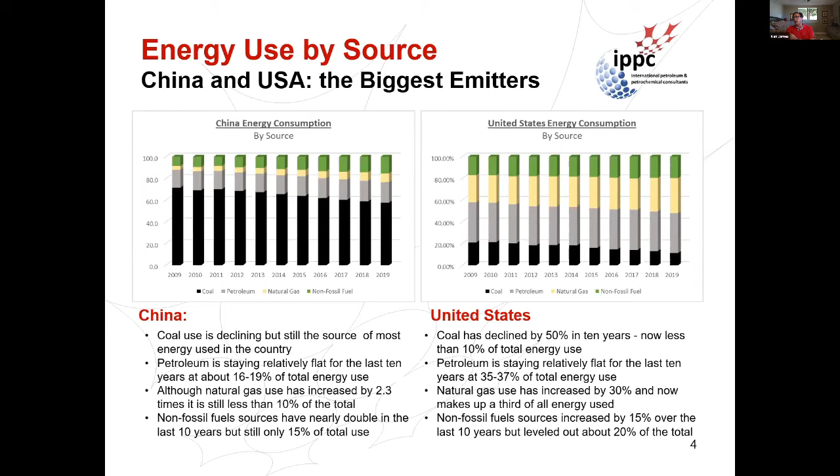So the focal areas that I've seen as people are looking to reduce carbon emissions, from the sources point of view, one is to look at less carbon intensive fuels. Coal phase out is well advanced, especially in Europe and North America. Similar phase out I expect will happen with the liquid fossil fuels.

And I think people are slowly accepting that natural gas has a huge role as a transition fuel as we move to other alternatives, whether it's blue hydrogen, whether it's nuclear. And I think we can tweak wind and solar, but again, those have limits on the capacity, and the wind and the sun don't always shine when we need the energy.

And then non-carbon fuels are getting a lot of attention. To me, you really have to look at hydrogen and ammonia, and carbon capture is essential to all of that. I just don't see it happening on any scale without basically being sourced from methane, electrolysis of water using green energy to make hydrogen, and then turn it into some other form of green energy. Thermodynamic processes are not 100% efficient. That just seems to be value loss.

So the focus I'm going to be focusing on in my presentation will be on the hydrogen and ammonia options as potential fuels.

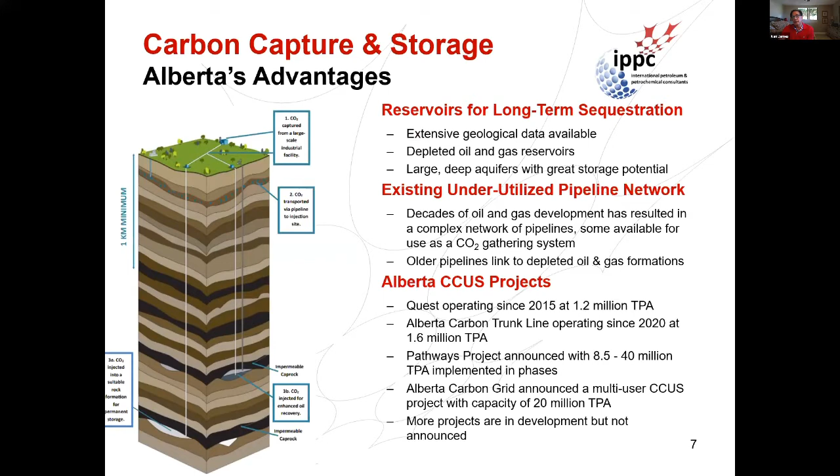So there is an opportunity for this province to capture tens, if not hundreds of millions of tons of carbon, which is a big advantage. That's a lot of natural gas being processed and carbon captured.

Some of the major challenges we're going to have, and I think Dr. Kumar referred to this, is hydrogen storage and distribution is difficult. It's a very low molecular weight molecule with a very, very low boiling point — it doesn't boil until minus 253 degrees C. So it is very difficult to get any density, and very difficult to compress and transport.

Pipeline connections to large consumer markets will be important. I don't know any other way that you're going to do it in any volume other than pipelines.

Ammonia is a very interesting option, in that it can be liquefied at relatively low pressure and offers an alternative way to transport to distant markets. At less pressure than you have in your propane barbecue, you can transport ammonia as a liquid, and it's got a high hydrogen content. And of course, when you use ammonia, it emits nitrogen — which is 79% of air anyways — and water.

Carbon capture, I think I've talked about this a lot — it's absolutely essential. Blue hydrogen requires large-scale carbon gathering and sequestration. Identifying the underground storage options and capacity will be critical. Nobody's going to build those blue facilities unless they know exactly where that carbon's going.

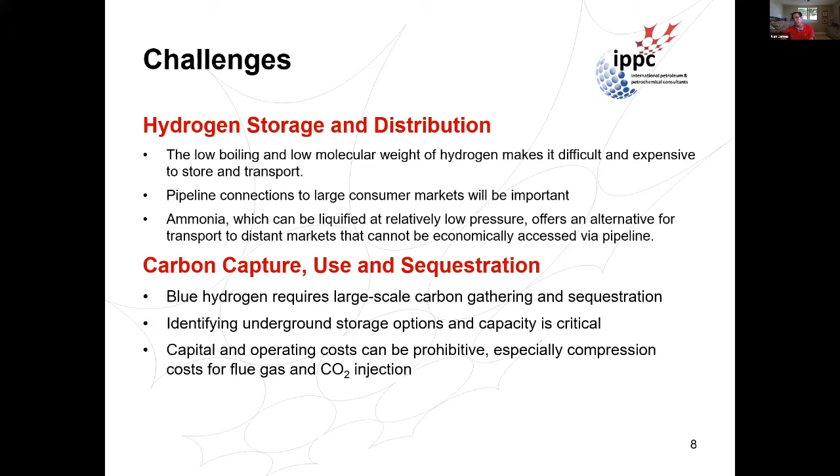Capital and operating costs can be prohibitive, especially the compression costs. Capturing CO2 from flue gas, most of the cost is actually compression, and the low concentration ends up in large volumes. The contactors end up being huge in the amine system. So there's a very, very high cost impact — and I'll get into the technologies that are addressing that.

Economics — carbon taxes can be major economic barriers unless those funds can be funneled back. Either they need to be uniformly applied across the globe, because otherwise you're just disadvantaging your own economy if other countries don't follow. And it's very critical that the carbon credits funded out of that carbon tax should be used to promote things like blue hydrogen.

Technically, over the last 30 years, we've seen a significant change in plant designs, but most of that was driven by energy efficiency. Early in my career, we only talked about peak oil, and I remember at the turn of the millennium we were talking about prices of oil going to $100, $200 a barrel. Companies got very focused on the amount of energy used. Then the shale gas and shale oil industries developed, and suddenly we had large amounts of gas and oil, and none of that came true. Climate change is going to change the focus again, I believe.

In the last decade, we've seen a lot of change in focus, but I haven't seen a lot of rubber hitting the road yet, but I think that's about to start. When we start thinking about these targets for 2030 and net zero by 2050, we are going to have to make some big swings very quickly. So we need to go back and look at the design of all of those energy systems, not just from an efficiency point of view. We're going to have to revisit the technologies we're using, and really look at how we design those facilities to reduce the cost of carbon capture and sequestration.

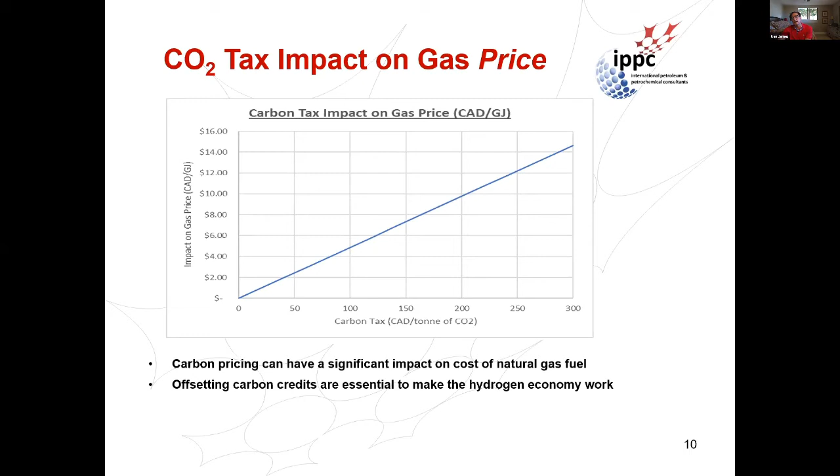You're basically feeding methane and water, converting that into what they call synthesis gas, syngas, which is a mixture of CO, CO2, hydrogen, and water. The primary sources of emissions are the stack, and of course all of the CO2 that was in the carbon molecules in the methane that is reformed to make the hydrogen. So that's a typical reformer, and that is the way hydrogen has been made up until now.

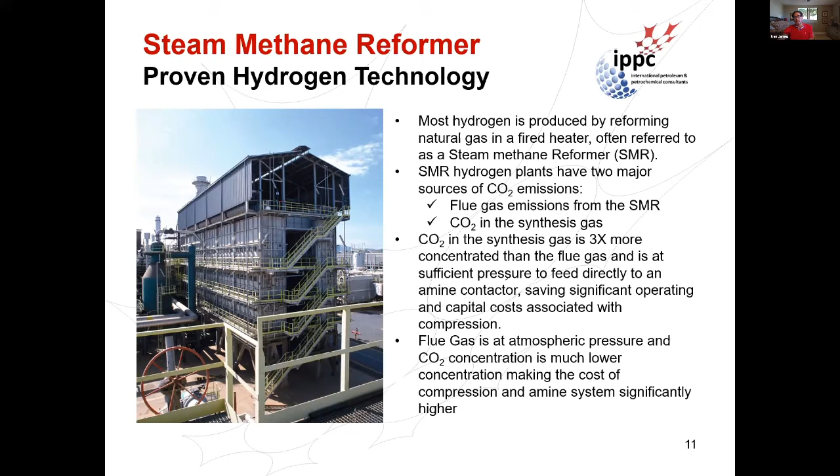Then that carbon monoxide can also undergo what they call a water gas shift reaction, reacting again with water to make CO2 plus hydrogen. So the net reaction is basically methane plus 2 waters makes CO2 and 4 hydrogens. It's interesting that only 2 of the hydrogen molecules came from the methane, 2 came from water — similar to what you'd do with electrolysis, but without using all that electricity. So it's important to get some of that hydrogen sourced out of water.

Partial oxidation — this is really where I think the changes in the industry are happening, in the design of a hydrogen plant to facilitate carbon capture. Partial oxidation is essentially injecting oxygen in substoichiometric volumes to not facilitate complete combustion, but partial combustion. You want to manage the amount of oxygen to control this first partial oxidation reaction, which takes methane and oxygen and turns it into CO and water. You don't want to keep going until it's complete combustion and turn it all into CO2, because there's an opportunity to react that CO with the water gas shift reaction to make even more hydrogen, which is the objective of the hydrogen plant. That is the technology essentially that leads to an autothermal reformer.

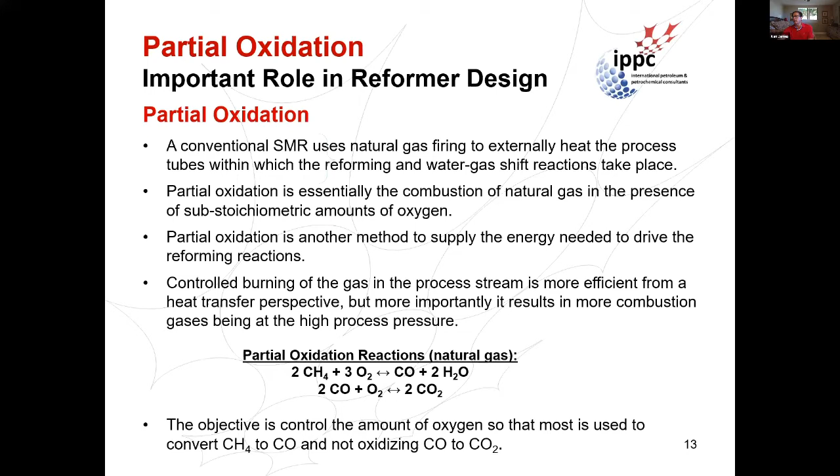With direct contact heating, it's virtually 100% thermodynamically efficient in transferring that heat to the gas, so that's a much better way to do it. The more efficient you are, the less gas you need to burn and the fewer carbon emissions. The other benefit is that the CO2 here is at full pressure. And if you recall, one of the biggest costs in carbon capture is compression. If you can do this at full pressure, then carbon capture becomes very routine.

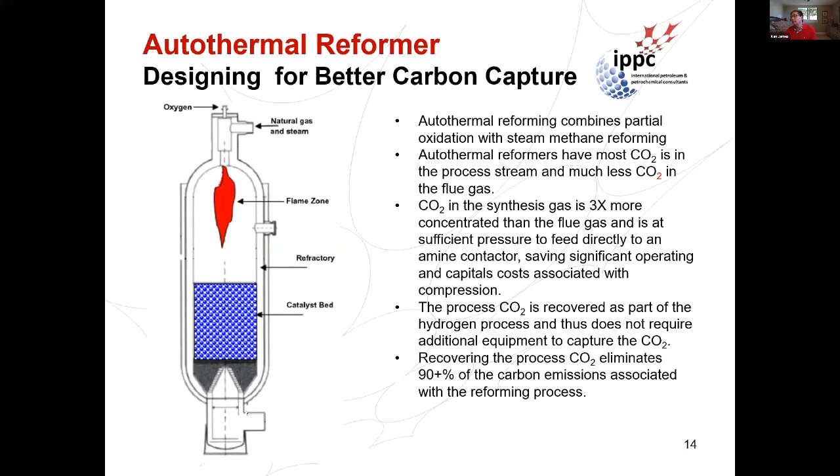So hydrogen as a potential non-carbon fuel. Advantages that I see are it can be produced in large volumes in this province. We've got lots of gas, and we are looking for new markets. We can locate it adjacent to underground formations suitable for carbon sequestration, reducing the cost of transport quite a bit. Existing pipeline networks can be used for distribution, which is important for reducing the cost of this full carbon gathering sequestration system. It can be used as a carbon-free fuel in a number of applications, whether it's combustion in fired heaters, used in fuel cells, or gas turbines.

The big disadvantage there, I think I mentioned, was the storage, a major concern. And there's no existing market. So we're going to have to count on the fact that if you build these plants, the markets are going to develop, and the incentives provided by the government will be sustained to make the economics work.

Ammonia is the other alternative fuel. So to me, that has some big advantages, in that it can be produced in large volumes. Its energy density is much higher. Again, it can be liquefied at moderate pressure, easy to then ship across oceans, which is not practical for hydrogen in my mind, not in any volumes.

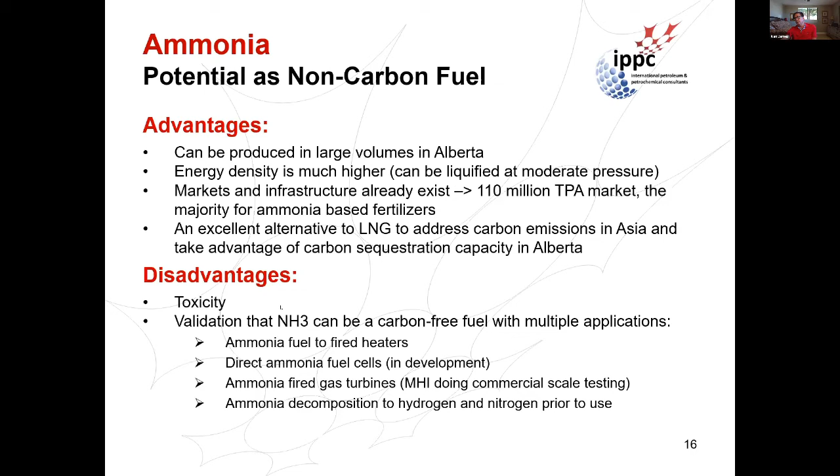So in my concluding remarks, I'd say the government policy on carbon credits needs to be clear for the long term to support project development. It's a critical role for the government to play to provide that stability to make these large investments.

Carbon capture infrastructure needs to develop immediately. Alberta does have a good head start, and there seems to be a lot of interest, so I'm very encouraged with that. I hope it does unfold to the scale that people are talking about. If companies are talking of having 50 to 100 million tons of carbon storage by 2030, that would be a great opportunity for the province.

Hydrogen markets, I believe, are going to need to be accessible by pipelines. We've got massive amounts of hydrogen or natural gas distribution, so we'll probably do the conversions where they're used relatively close to where the users are. And if we can convert some of the large pipelines that used to export gas to the US, maybe that's an opportunity for the US. Ammonia, I believe, was the most viable option for providing an alternative for Asian markets.

And I think there's a lot of work that needs to go into plant designs for hydrogen and ammonia to basically focus on efficiency and better facilitate carbon capture. And that's my presentation, so if there's any questions.

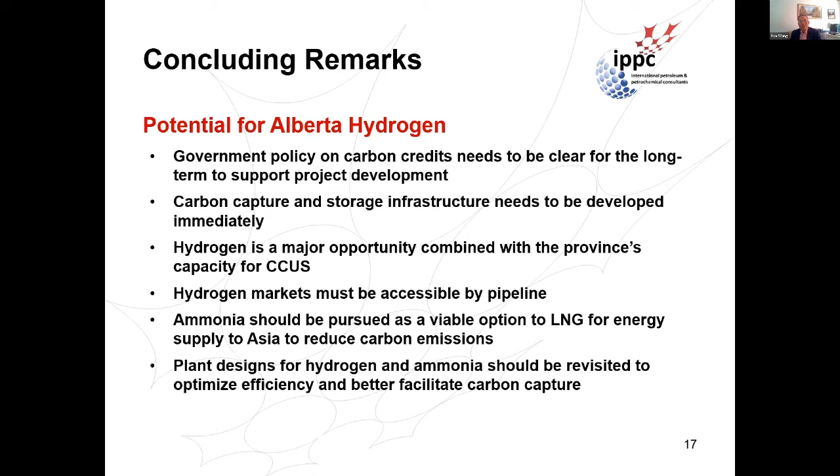Yeah, okay. Our next speaker is Mr. ZhiMing Mao, who is a graduate from the very top technical university of China, that's Tsinghua University. And I'm jealous.

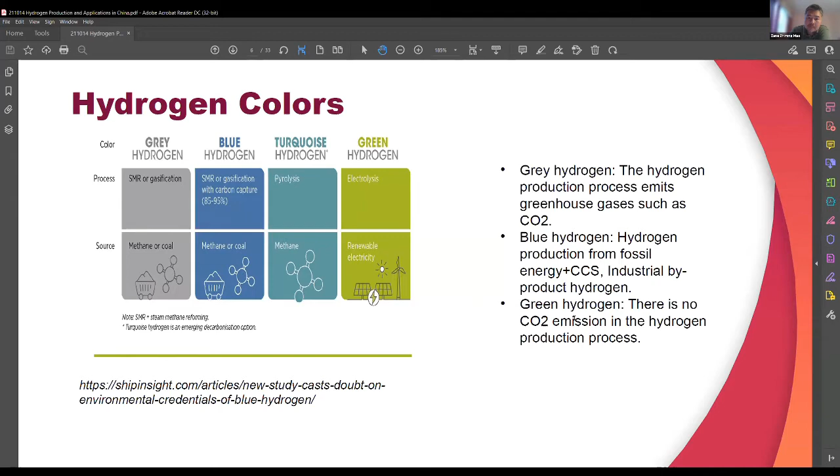As reported, hydrogen production in China is about 21 million tons in 2016, 30% of global production. Next is US, approximately 10 million tons each year according to DOE. Canada ranks in the top 10 with some 3 million tons annually for industry use, approximately 4% of the global total. Around 96% of global hydrogen production is generated from fossil fuels, including 48% from natural gas, mostly natural gas reforming using steam, 30% from hydrocarbons and alcohols, and 18% from coal. Hydrogen production from water electrolysis only counts about 2 to 4%.

In China, about 62% of hydrogen is generated from coal right now, and about 19% from natural gas, because China has a lack of natural gas. Hydrogen by water electrolysis only accounts for about 1%. For a long time, hydrogen has been used in agriculture, chemical, metallurgical, and many other industries.

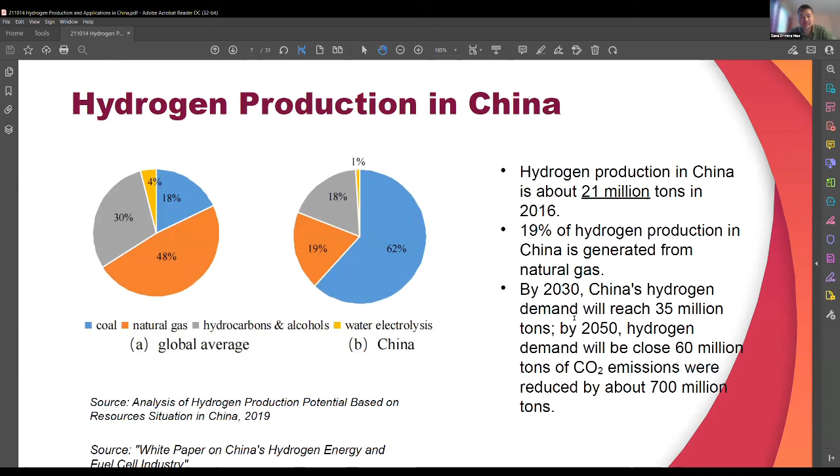In 2021, more than 1/3 of the big enterprises made the hydrogen layout in the entire industry chain, including hydrogen production, storage, refueling, and use. This group includes Sinopec, PetroChina, National Energy, Hu Huanyong, State Power Investment, Three Gorges, National Nuclear, and many other big groups.

Sinopec is the biggest one, the world's largest petroleum energy consumer, and it produces 3.5 million tons of hydrogen per year, accounting for about 14% of China's total. In the next 5 years, they plan to build 1,000 hydrogen infrastructures, hydrogen filling stations, or hydrogen and gasoline combined filling stations. Its goal is to become China's biggest hydrogen energy provider.

According to Hydrogen Energy News, from January to October 2020 the domestic hydrogen industrial investment reached 140 billion yuan. In the first half of 2021, the total investment of hydrogen fuel cell projects in China exceeded 170 billion yuan, around 30 billion Canadian dollars.

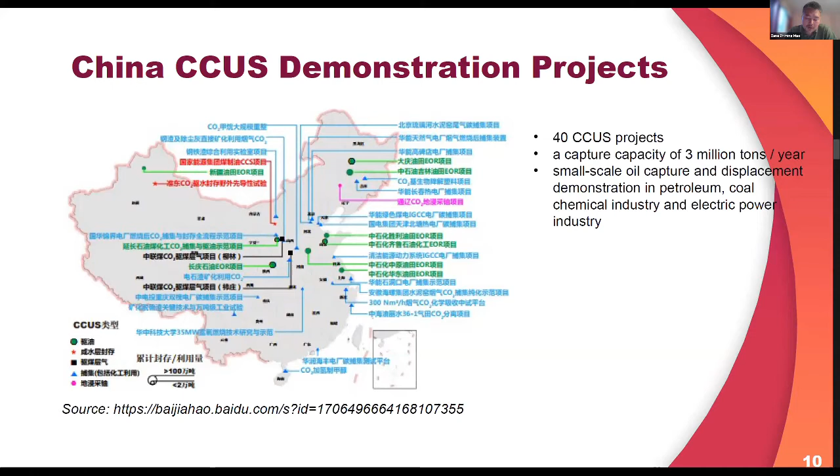This is one of our projects: HCNG, hydrogen mixed compressed natural gas, from 2010, with Hu Huanyong. We cooperated with Shanxi Natural Gas Corporation to establish China's first HCNG station, generating daily 200,000 cubic meters for industrial and heavy truck use.

Before that, we developed technology for the HCNG internal combustion engine, pressure vessels, mixing skid, and metering devices. The project investment is around 15 million Canadian dollars for the station, covering an area of 7,000 square meters at the south of Shanxi province near the Yellow River.

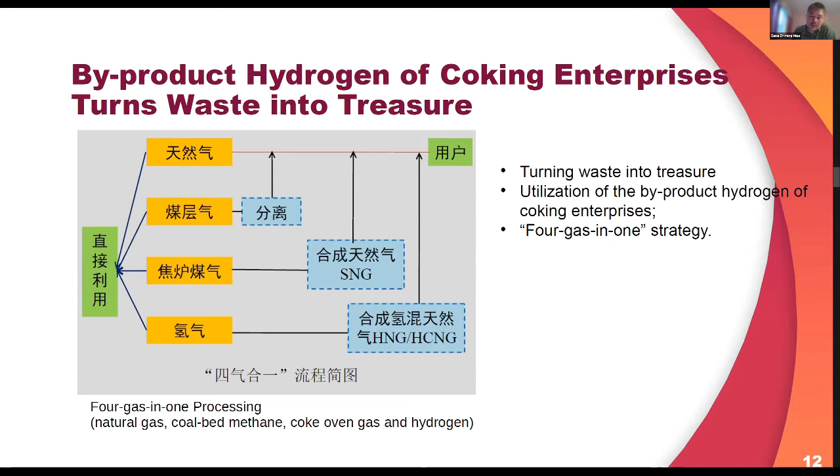This group controls 80% of the natural gas pipeline network of Shanxi province. The station provides HNG to industrial customers and HCNG to truck fleets, with 3/4 for industrial use at low pressure around up to 6 megapascal, and others compressed to 22 megapascal for heavy truck fuels.

For the mixer, we use a static mixer and pneumatic fume cut valves to check the flow, pressure, temperature, and Wobbe index for proper positioning and responsive sensitivity. The control system has a self-locking function to prevent arbitrary operation.

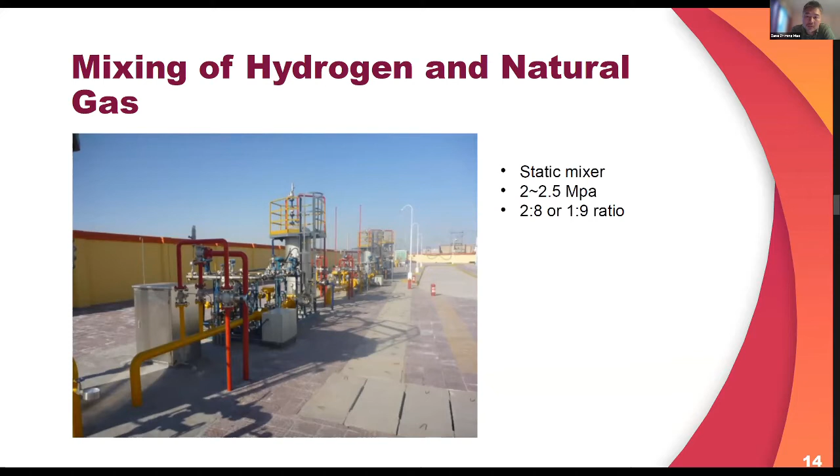The mixture rate is different: for industrial users, we choose a 1:9 ratio, and for truck users, we choose 2:8.

We use 3 steel wound high pressure gas storage tanks because of small area requirements and low construction difficulty. The tank is made by 80mm strip steel with a thick winding belt layer outside the inner layer of the tank to achieve high pressure resistance for safe, reliable, and stable operation.

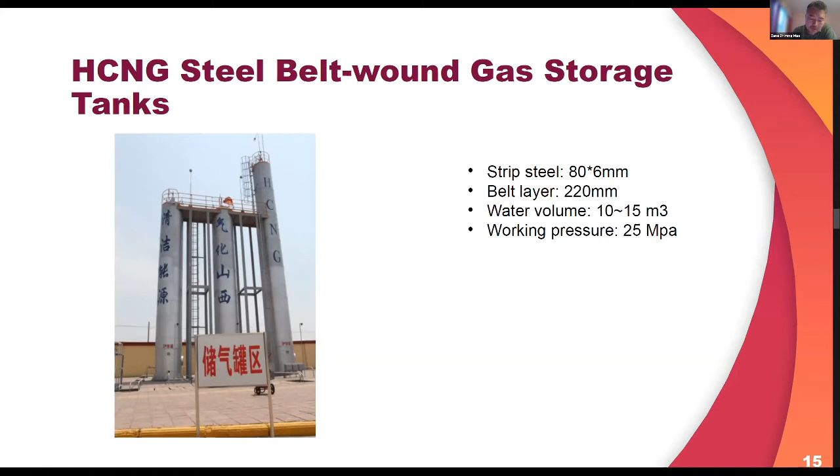The working pressure of the tanks is 25 megapascal, around 3,600 PSI. The water volume is 15 cubic meters for one tank, and 10 cubic meters for the others. We use diaphragm compressors as compression devices for the mixed gas, because it's a non-oil lubricated positive displacement compressor, which we adapted for the HCNG fuel.

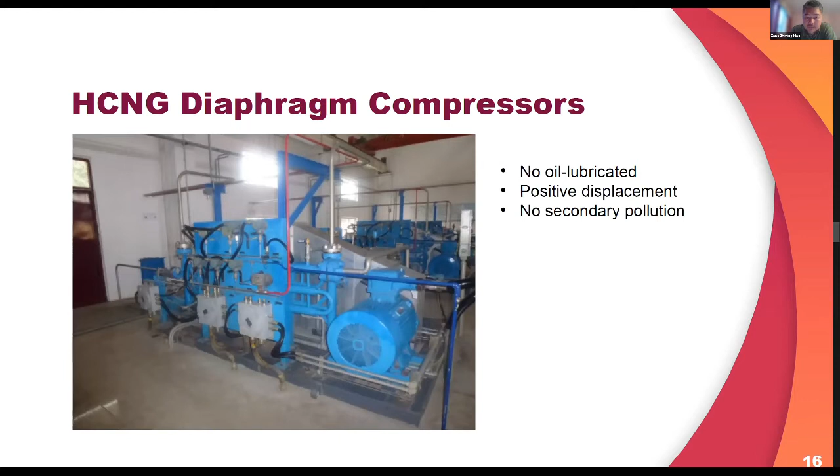The HCNG fueling reduces the emission of pollutants, mainly carbon dioxide and NOx, from the automobile exhaust. Compared to pure CNG fuel, it can reduce emissions by more than 4,000 tons of CO2 and 40 tons of NOx, which is lower than Euro 4 standard.

We also push forward for the HCNG fuel station in China, using important data from our project and the standard published in 2017.

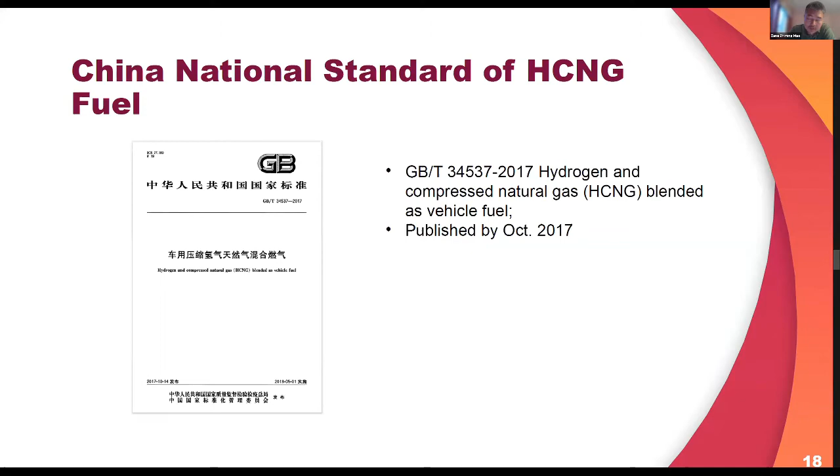For green hydrogen, China has strong solar PV and wind power capacity, which is the basis for production of affordable green hydrogen. Because of the cost problem, every green hydrogen project needs to consider how to get profit from it.

In 2019, China's new added PV power capacity was 30 gigawatt. The cumulative installed capacity reached 204 gigawatt, which generated 224 terawatt hour (billion kilowatt hour), accounting for about 3% of the country's total power generation that year.

In 2020, the cumulative installed capacity of wind power in China was 281 gigawatt, including 271 gigawatt onshore and 9 gigawatt offshore, generating 466 terawatt hour, about 6% of national total power generation and 21% of total renewable energy power generation.

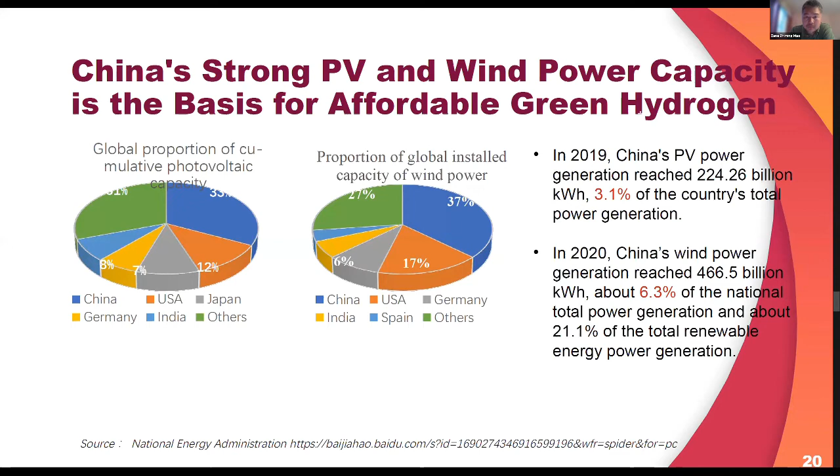The next case is another project in Jilin province, north of China: 200 megawatt wind power to hydrogen production. This project was designed in 2015, not only for science research but also considering economic evaluation, location, and local regulations, and it was approved by the National Energy Administration.

The main issue we wanted to solve is the unstable characteristic of wind power, using hydrogen production through electricity and proper operating mode to adapt to this situation in energy conservation process. The second issue is that at that time, forms of energy storage were very limited in scale, time, and space - it's hard to match the magnitude for wind curtailment and power rationing.

That only achieves very short period energy conservation and storage. So we wish hydrogen, as a form of long-term and large-scale storage and transportation, provides the possibility for a new business model in this project.

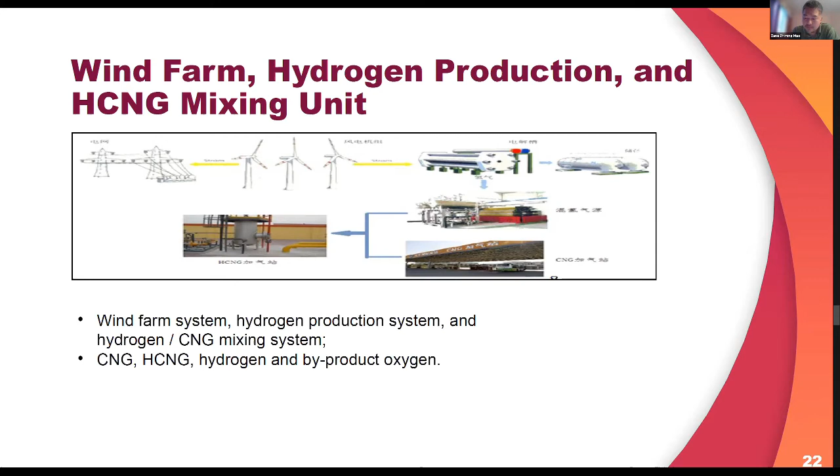That's China's fuel cell policy and national demonstrations right now. So far, China hasn't issued a national hydrogen plan or roadmap, but 30 local governments have issued their own hydrogen energy plans with varying timelines.

Recently, the central government announced two nationwide demonstration projects. One is Hydrogen Fuel Cell City, with 3 city groups running fuel cell vehicles. Beijing city group, including 12 cities, plans 74 hydrogen stations, and Shanghai, including 6 cities, plans 105 stations.

Another project is Hydrogen into 10,000 Families, jointly created by the Ministry of Science and Technology and Shandong province. That means 1 hydrogen highway, 2 hydrogen ports, 3 population science spaces, 4 hydrogen parks, and 5 hydrogen communities.

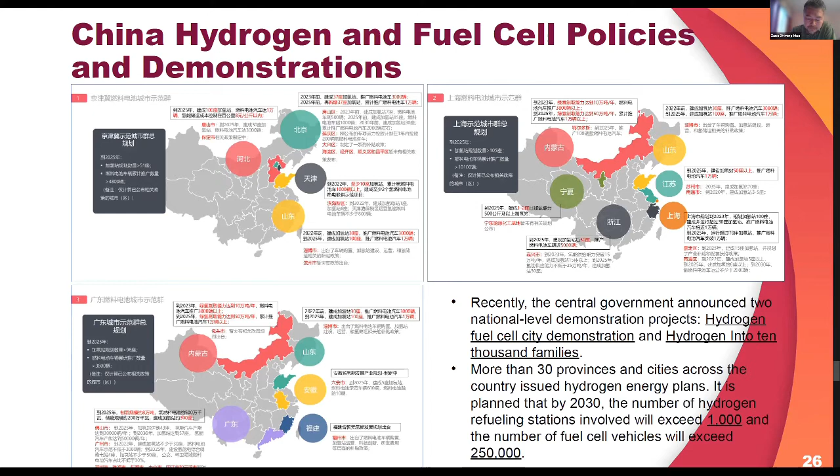In 2020, China had built a total of 118 hydrogen fueling stations, with another 167 under construction or planning. Among them, 101 completed hydrogen fueling stations have been put into operation, and 17 are to be operated - the third most in the world.

In 2020, there were 553 hydrogen fueling stations in the world, 200 in Europe and 142 in Japan. In 2019, more than 3,000 fuel cell commercial vehicles were produced in China, ranking first in the world.

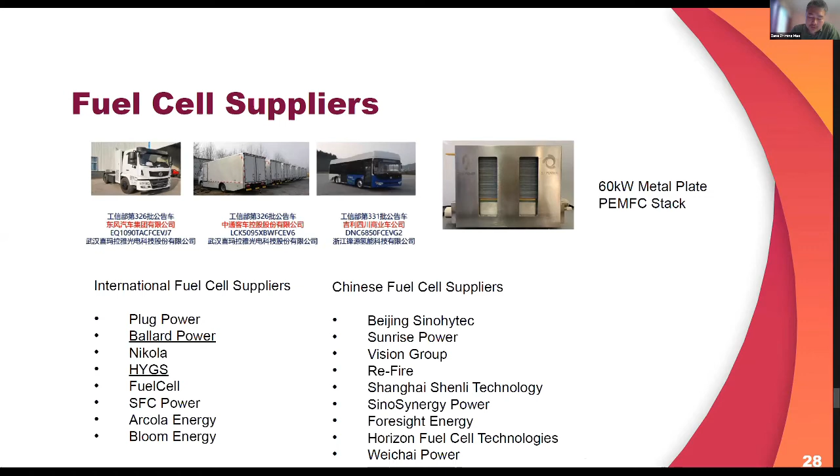The left picture shows fuel cell vehicles, buses, and trucks approved by the Ministry of Industry and Information. The right one shows a 60 kilowatt metal plate water cooling PEM stack made by one of our business partners.

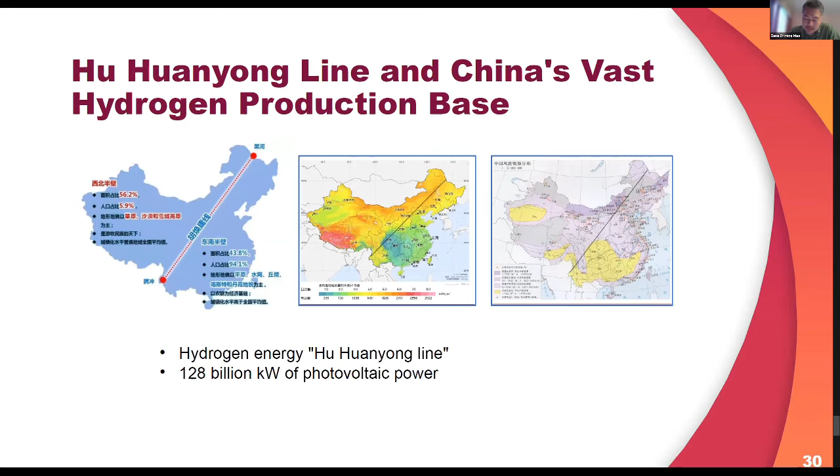And hydrogen strategy, such as natural gas, CCS, green hydrogen, vehicle use, and hydrogen export, is similar between Canada and China.

In real projects, the goals and conditions are very different. We really need a business model case by case for every concrete project to make it more successful. From HCNG, P2G, CCS, microgrid, energy storage, even desalination and many other projects, I wish more and more people can work together to produce more and more clean hydrogen to make the world better. That's all. Thank you.

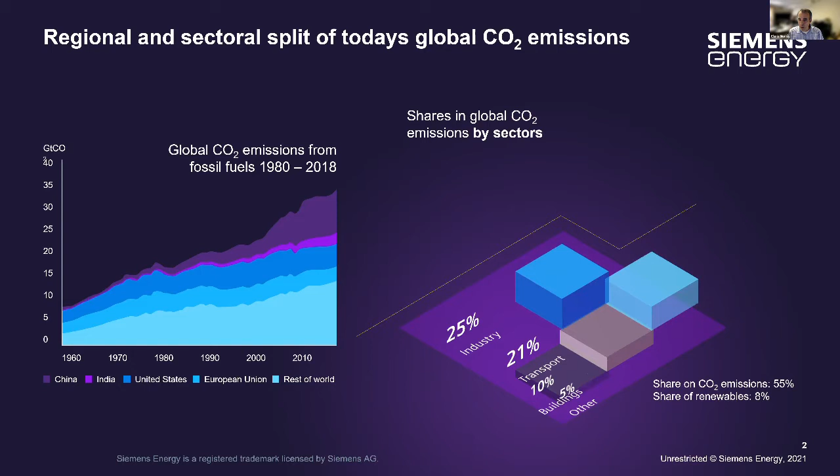And then we see that the power sector does have a significant contribution to GHG emissions, but what we're seeing, to everybody's optimism and excitement, is that a significant proportion of renewables is penetrating into the power sector.

Now, the question is, how do we decarbonize those difficult-to-abate sectors with the renewable energy that's coming online? We certainly will need a significant amount of new renewable energy in order to do it, but we'll also need the intermediate technologies to get the renewable energies into those areas of the economy that need to be decarbonized. And we use the term sector coupling to talk about how we're going to pull transport, buildings, and industry together with renewable power.

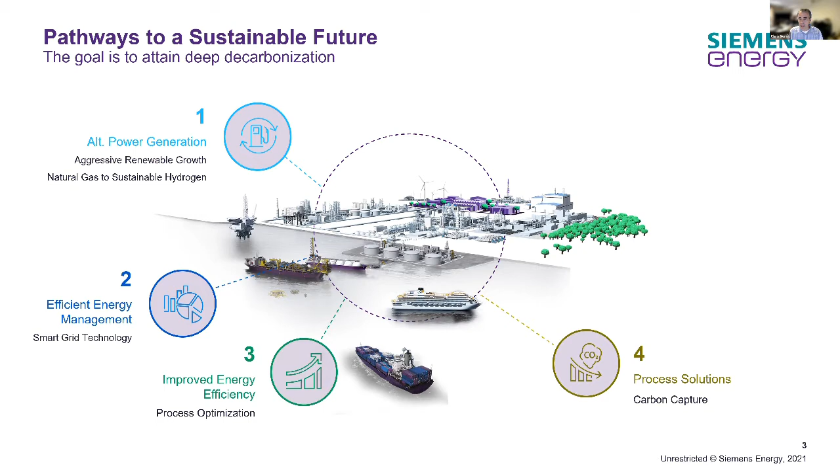And of course, there are process solutions. A lot of what we discussed so far today is about carbon capture from existing technology processes. And then, last but not least, we have one of the pathways to a sustainable future, which is hydrogen utilization.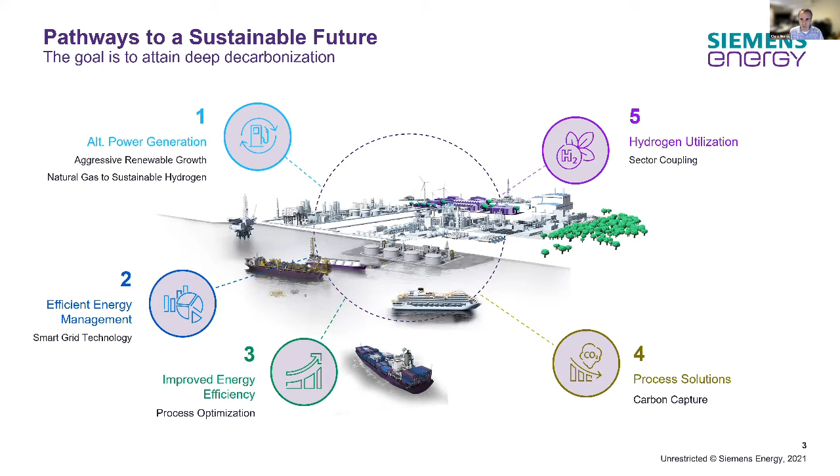Certainly, we've seen hydrogen emerge as a promising technology in the past. We're seeing a resurgence now, but I echo the comments of the previous commentators when I say that we need to make sure that we carry this momentum forward into actualizing what we're hoping for.

In terms of demand, I don't think I'm telling anybody anything new here about the rate of growth of hydrogen demand. It's anybody's guess what it's going to be in 2050, but the projections are that it's going to grow at quite a significant compound annual growth rate, if present predictions are any indication.

And then where does it all fit in? On the right, we see what Siemens Energy sees as essentially our field of action. Starting on the left, hydropower, wind power, renewable power production into the grid, solar power production, transmission. And then in blue here, we see our electrolyzer, we have compression, transportation of the molecule through the pipeline back to potentially a gas turbine where the re-electrification pathway takes place.

E-ammonia, I'm not telling anybody anything new here in terms of the amount of promise there is for the use of hydrogen as a coupling mechanism between sectors. We know that there are trillions of dollars in assets

worldwide right now that run on liquid hydrocarbons. Without stranding those, they're going to be operating for a significant period of time into the future. We need to do an infrastructure transition to operate on lower carbon intensity energy sources, battery-powered cars and trucks, as well as the multiple other uses of electricity used directly.

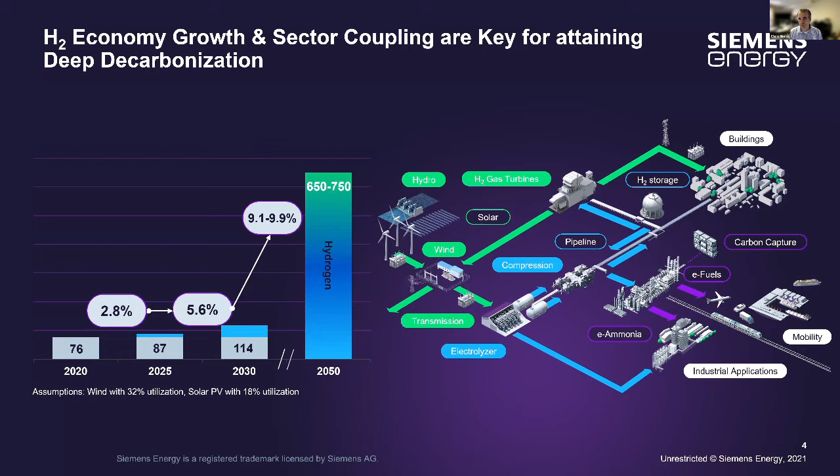A carbon-free hydrogen economy will support CO2 reduction. The question is, how do we make the hydrogen carbon-free? I think a lot of this has already been said by the previous speakers. I won't talk at all about the production of hydrogen because that's been clearly covered. But the title of my talk today is about readying the infrastructure for hydrogen, for the energy transition and the hydrogen portion of that.

So we see blending of hydrogen and transportation of hydrogen in physical form. As was just explained by the previous speaker, significant pathways exist and are being actualized in China as well as in North America and Europe. We see synfuel and chemical production in terms of methanol and ammonia, which are clearly two of the most promising pathways for managing this difficult to manage substance, hydrogen.

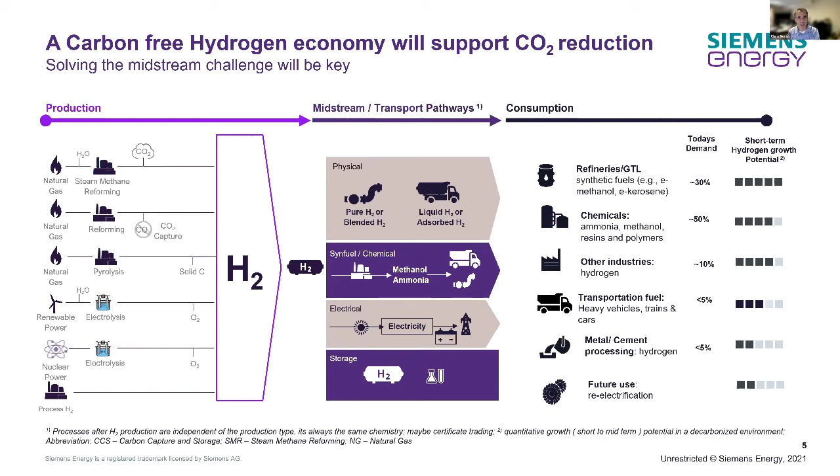Well, I'd like to jump right now into some examples. What are we doing here in Siemens Energy to actualize this promise? We have a project in southern Chile, the Haru Oni project, the world's first integrated plant for the production of climate-neutral e-fuels from wind and water.

So we are using carbon dioxide captured directly from the atmosphere, direct air capture carbon dioxide, combined with hydrogen from a Siemens electrolyzer, powered by renewable energy in the form of wind in a geographical area that has high wind potential, synthesizing methanol from these ingredients and then converting the e-methanol into e-gasoline for transportation back to Europe.

I think this makes an important couple of points about the way Siemens Energy, a German company, sees the future of the energy sector. One is Germany is going to rely on imports of power for a long time to come, imports of energy.

So why not be a producer of its own energy elsewhere in the world, especially where renewable energies are very promising? This explains the deployment of this project in southern Chile, in the Patagonia region, where the wind potential is very high. Bottle up that renewable energy in a usable form and transport it back to Germany.

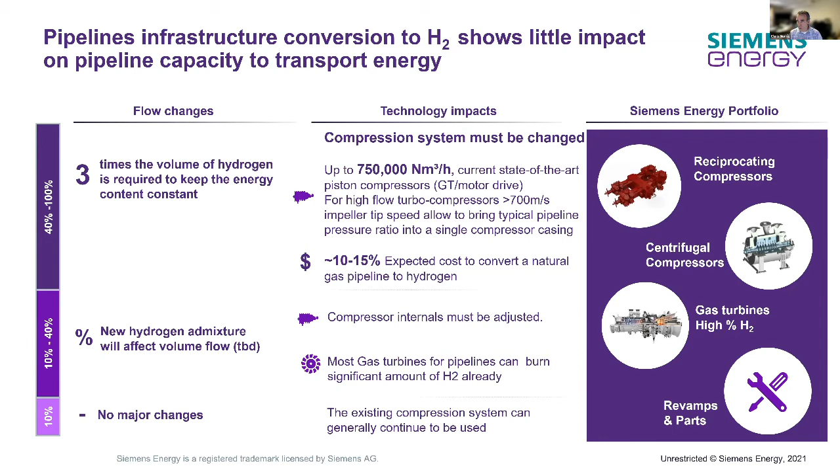As an example, Europe plans to create an extensive hydrogen pipeline and storage infrastructure, what they call the H2 backbone, connecting large industrial centers. We're looking at long pipelines, and an important aspect to recall is that moving these molecules, despite moving a lot of mass from place to place, in a linear pipeline arrangement you're able to move a tremendous amount of energy held up in those molecules, be they hydrogen, methane, synthetic methane, or any derivative. A long distance pipeline can have 10 times the energy carrying capacity of a high voltage overhead line, something even those of us who are advocates of green hydrogen need to keep in mind.

Converting those electrons into molecules and moving the molecules around is essentially very cost effective, rather than trying to build out transmission to do deployment of green hydrogen at a micro scale. For hydrogen transportation capacity by pipeline, despite the density difference and the energy difference that compensates, you can essentially have a net equal amount of hydrogen transmitted from place to place through pipelines. Of course, there are other technical aspects that must be considered, like the amount of power required to do the compression on hydrogen. But essentially, it doesn't take away from the promise of this substance as a decarbonization pathway.

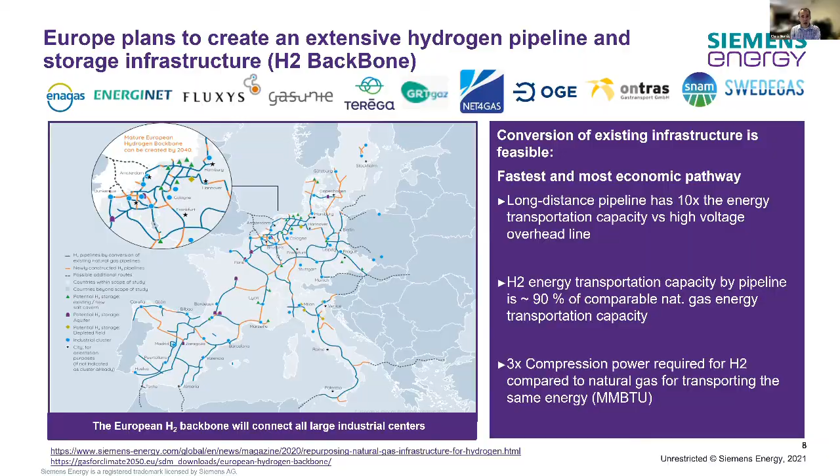So where does Siemens Energy capabilities fit into all this? Here we see essentially the value chain of green hydrogen. From the left-hand side, planning and consulting, Siemens can do essentially everything, including balance of plant.

I start here in the middle when I look at this figure, with the electrolyzer that converts electricity into a gas. We conventionally think of it as a device that converts water into hydrogen, but really it's a device that converts electricity into hydrogen and uses water as a proton source. It's an electricity gasifier.

From the downstream point of view, all the aspects you're familiar with Siemens Energy for, and Siemens previously, compressors, storage systems, water treatment, etc., all the handling of the gases can be done. Further downstream in the value chain, that's where we get into partnerships, whether it's carbon capture for synthesizing follow-on molecules, or the synthesis of molecules themselves. Our extensive abilities and partnerships in the industry facilitate that.

And then looking left upstream, from an electrical point of view, you're all familiar with Siemens' capabilities around transmission, distribution, substations, transformers, all the things that make the grid and the electric system work.

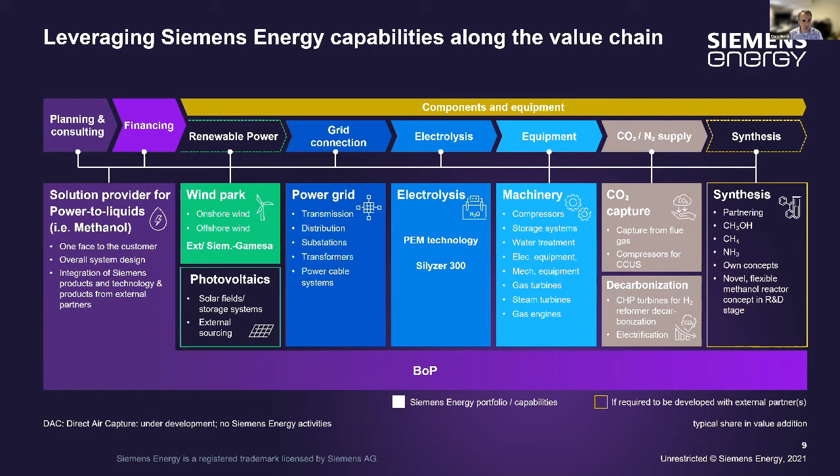So how do we scale this up? Our approach is the latest model of our PEM electrolyzer, the Silyzer 300, implying it's the third generation. Siemens has been in the hydrogen business for quite some time, whether it's fuel cells for military use, which we've done for decades, or the PEM electrolysis approach we've been working on for at least 10 years and commercialized a couple of generations of it so far.

Here we have the Silyzer 300, a 17.5 megawatt base system. Each of these modules is about the size of a residential fridge, just under a megawatt each, comprised of 50 proton exchange membrane module assemblies. The device operates at atmospheric pressure.

It's a very passive and robust device. All the fluid motion is driven by natural buoyancy. So you see a two-phase, or at least a gas-liquid mixture coming out of the modules and being separated in these separation tanks overhead. The downstream balance of plant does things like deoxygenation, drying, and compression for the downstream processes.

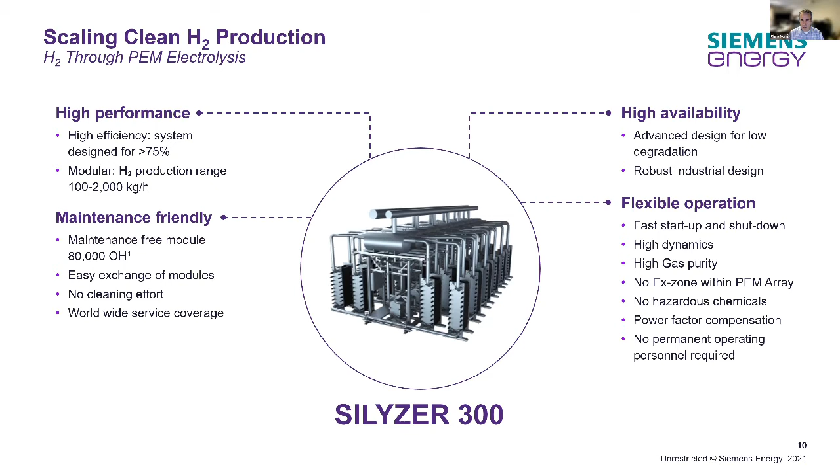High availability due to the robust design I mentioned. Flexible operation, as is the nature of PEM electrolyzers, and essentially maintenance free. An 80,000 hour operating lifetime for each of these modules, easy exchange of the modules at end of life, no cleaning effort, service coverage around the world. Really a strong workhorse for the new green hydrogen production economy.

Of course, it's digitally enabled with all the digitalization aspects that Siemens has in its capabilities.

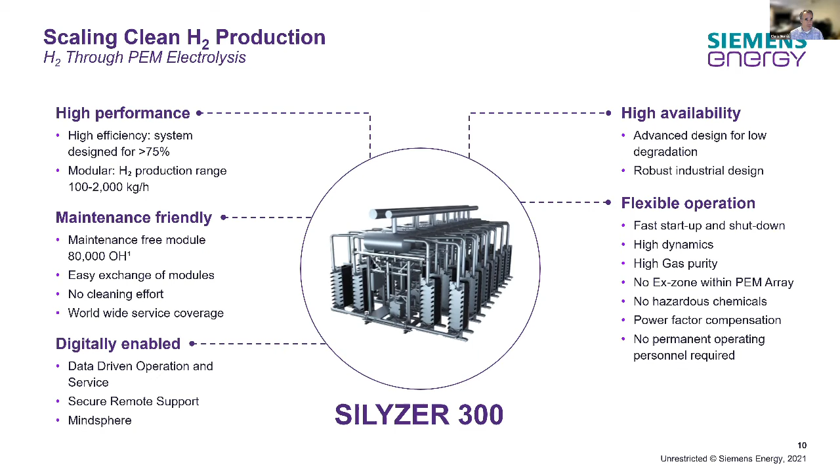So getting back to how do we keep our existing fleet? We talk about the energy transition, and it's important to remember that it is an energy transition. A lot of gas turbines are deployed and in operation. Siemens has a publicly stated goal of having 100% of our gas turbines completely hydrogen compatible by the year 2030, within 10 years. Many of them are significantly capable of burning hydrogen under current circumstances and with small changes to combustion systems, etc.

So with retrofits, as well as with new devices, we can see a significant reduction in the overall CO2 emissions.

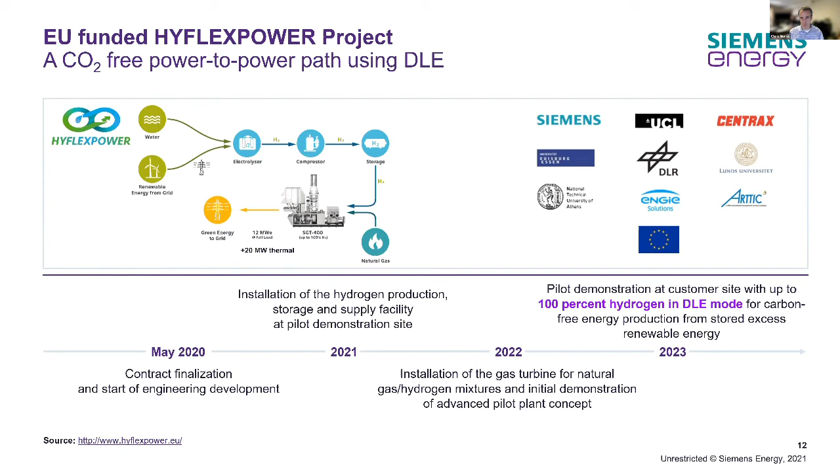Another example of what we're doing to make this real is a project with Duke Energy and Clemson University in South Carolina. Also similar to the previous one in the form of power-to-power, sponsored by the U.S. Department of Energy, basically taking low-cost renewable power and converting it into a long-term, low-cost storage mechanism.

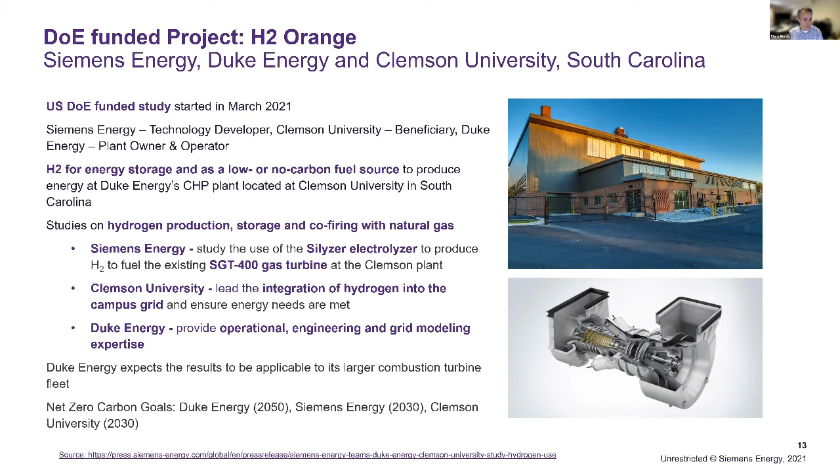Okay, well, I definitely wanted to keep my comments brief. I'm happy to answer more questions in the chat or in the forum.

But essentially what we see as the cornerstones of the future energy system: decarbonizing energy, sector coupling through hydrogen, power to X, so converting that hydrogen into other forms that may not be reused as power, for example, ammonia, as a basis for fertilizer. And we need to see, as some of the previous commentators have stated, a regulatory framework globally, also in Alberta, that promotes the use of hydrogen and the reduction of CO2 hand in hand.

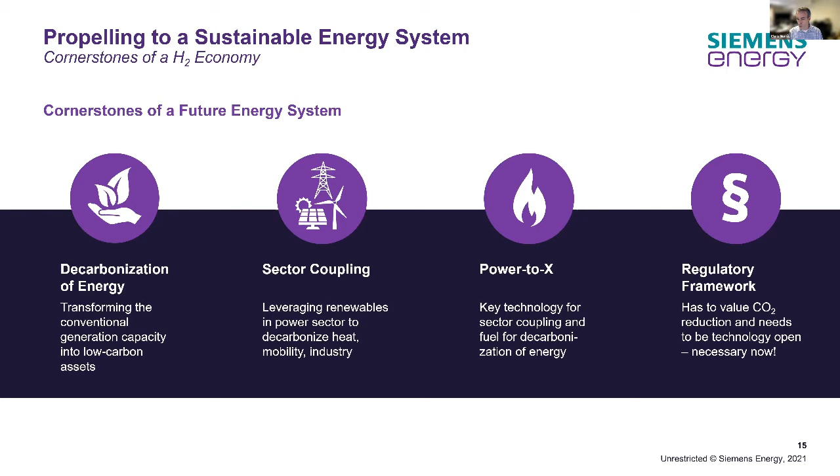With that, I'll say thank you very much, and I look forward to the questions and the discussion.

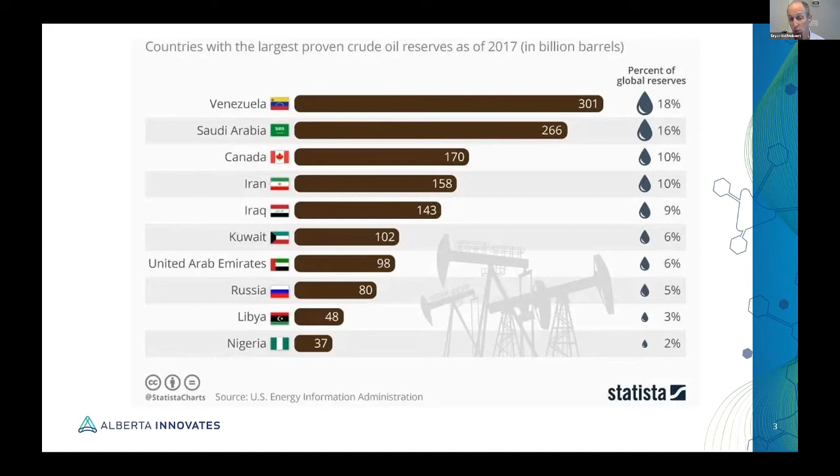And so this is a result of vehicle electrification, of hydrogen, we've heard so much about, a huge opportunity, circular plastics economy, a whole bunch of different global trends are conspiring to make this into an eventual reality. And so this puts us into an interesting position.

So Alberta is going to need new and expanded markets for this bitumen resource that we have a lot of. We want to maximize the value of that bitumen. We also need to reduce our greenhouse gases. And while industry has done a pretty good job at reducing upstream emissions, 80% of the emissions associated with bitumen and oil actually occur at combustion, or scope 3. And there isn't a lot out there right now to really look into that.

We also want to diversify the economy so we can get away from the boom-bust cycles that we've endured in Alberta. Now, a challenge is that bitumen has a high molecular carbon content compared to other oils. So we'll come back to that in a moment, but that is one of the key characteristics of bitumen.

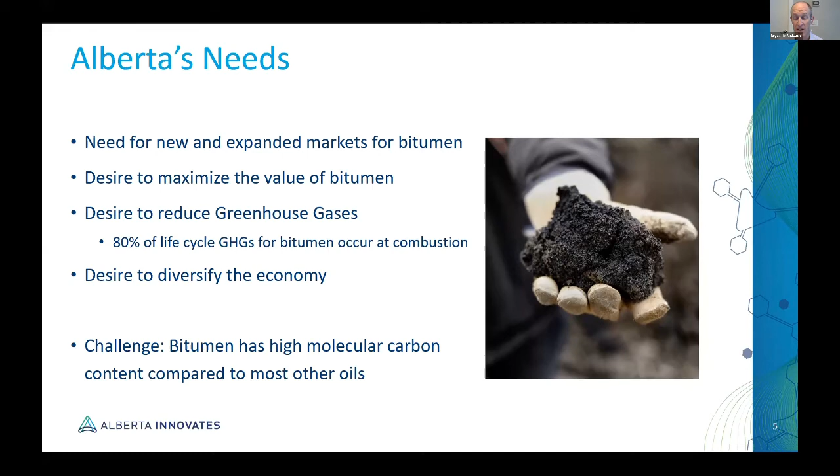Now, that's Alberta's needs. How about the globe? Globally, we are dealing with population growth. Over the next 30 years, we are going to grow the planet by about 2 billion people. That's about a quarter. To put that in context, that was the entire population of the planet only in the 1920s—not that long ago. And we're going to grow by that again here in the next 30 years.

In addition to population growth and additional prosperity, these populations are going to need energy products, which we're talking about, but they're also going to need materials for housing, transportation, infrastructure, and consumer goods. And if you look around you right now, what is it that a lot of the materials around you are actually made of but carbon?

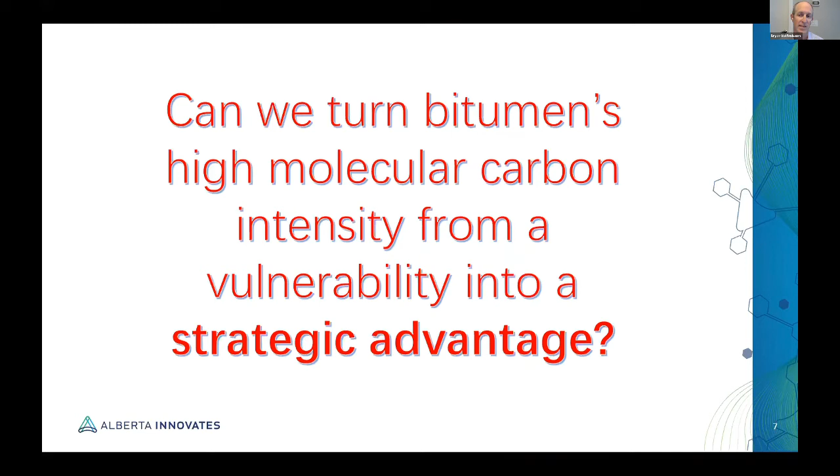Now, we talk about this low carbon economy, but it's a bit of a misnomer. What we really mean when we say low carbon economy is keeping carbon out of the atmosphere. Carbon in solid form is sequestered and inert, and therein lies the opportunity. Can we turn bitumen's high molecular carbon intensity from a weakness, which it is when making energy products and fuels, into a strategic advantage for making materials? So that very characteristic that makes it poor for fuels makes it a significant opportunity for materials. And hence we have bitumen beyond combustion.

Alberta Innovates launched this opportunity back in 2017. We commissioned Dr. Axel Meisen to do a white paper looking at all the different products that you could conceptually make out of the oil sands. And these aren't just carbon intensive products, but also some metals and minerals and such. Now, not all of these are necessarily a good idea, but they're technically possible.

So we followed that up the next year with a deeper dive into what we thought were the most promising opportunities. And many of these opportunities rely on this component of bitumen called asphaltene. Asphaltenes make up 15 to 20% of the barrel, and they are that heaviest component. They are what give bitumen that characteristic high viscosity, sticky, gooey stuff. And so we narrowed it down to these top 5 products.

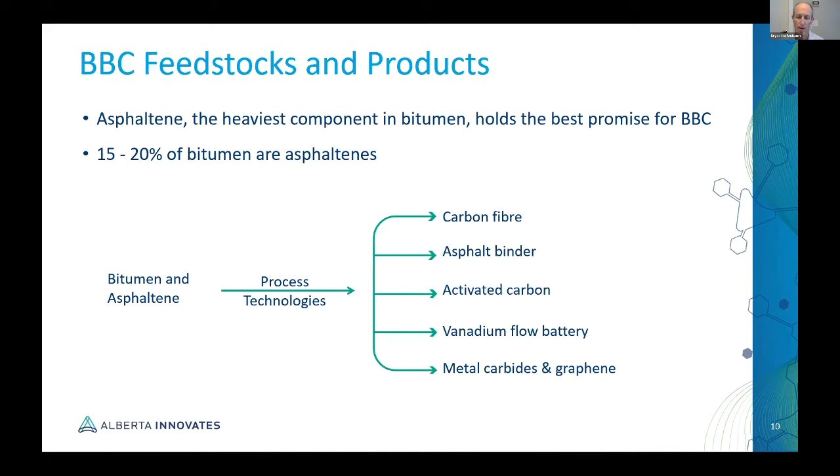Now, unfortunately, I only have 20 minutes, so I'm just going to address the first 2 products here, which are carbon fiber and asphalt binder. But there's certainly more BBC opportunity beyond that.

So let's dive into carbon fiber. Many people are familiar with it. It's a class of materials, not a singular type, characterized by extremely strong strength, up to 10 times stronger than steel on a weight-to-weight basis. And perhaps more impressive is that it is non-corrosive. And so that makes it a basically universal building material with a whole bunch of different applications. You may be familiar with it in your golf clubs, your hockey stick, or your bike. The biggest market is actually wind turbine blades, and of course aerospace and other.

Current production is a healthy 100,000 tons per year, growing at a very significant compound annual growth rate of 13% per year. But this is still pretty small when you compare it to materials like steel and other metals and plastics. So it's still fairly niche, even though it's produced at 100,000 tons per year.

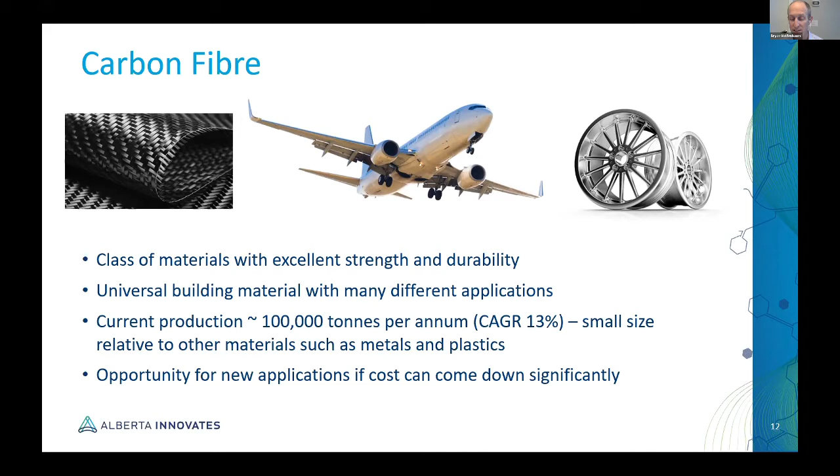Now, it's been well documented that if we can get the cost of carbon fiber down, then there are significant new markets to get into. In fact, it's been postulated that the market for carbon fiber could grow by 10 times basically overnight if the cost were cut in half. So let's talk about that.

The current carbon fiber price runs around $18 to $35 a kilogram, depending on the performance specs that you need. The target to really start to unlock large-scale automotive use is $11 a kilogram—roughly half, that's $5 a pound. Now, the challenge and the reason why this hasn't happened has to do with the feedstock that we use today for carbon fiber. That feedstock is known as polyacrylonitrile, or PAN. And PAN on its own costs $10 a kilogram. So obviously, it's pretty much impossible to hit a target of 11 when you're starting with a feedstock at 10 and you still have a lot of processing to do.

On the other hand, bitumen-derived asphaltenes cost less than $1 per kilogram. So you immediately have a huge price opportunity. But that's not the only advantage when you compare bitumen-derived asphaltenes to PAN as a feedstock. The carbon yield is materially higher, and the process is different—that would lend itself to better scaling.

And a recent study by none other than co-panelist Dr. Kumar shows that the greenhouse gas emissions intensity would be less than half.

Another really interesting opportunity has to do with the supply chain. So I'll give you an example. If you're fortunate enough to drive a high-end BMW, you have a few carbon fiber parts in that vehicle. Where did those parts come from? Their story starts in the Middle East, where the hydrocarbons are produced. Those hydrocarbons are shipped to Japan, where they're converted into polyacrylonitrile. From Japan, it's shipped across the Pacific to Washington State in Moses Lake, where that PAN is converted into carbon fiber. And then that carbon fiber is shipped to Germany, where it's installed in a BMW.

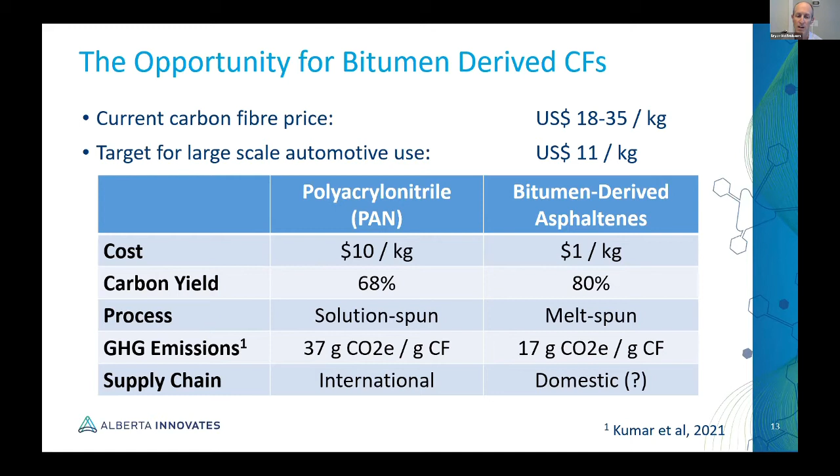So a truly global supply chain with all of the inherent costs and emissions associated. Whereas if we talk about bitumen-derived asphaltenes, we have the feedstock here. We have huge manufacturing complexes in Ontario, Quebec, as well as the US, of course. So if not a fully domestic, then at least a continental supply chain, which would be much more efficient.

So let's talk about the potential here in dollars. Take a barrel of bitumen, we'll call it $30 a barrel as the gross revenue potential. Obviously right now it's a bit higher, but it wasn't long ago, as was pointed out earlier, that it was much, much lower. So say $30. Now, if all you did was separate out the asphaltenes as a feedstock for carbon fiber, you already achieve a significant value add. That remainder of the barrel, the de-asphalted bitumen, is now a light oil that can move without diluent and fetches a higher price.

And then the asphaltene feedstock itself sells under $1 a kilogram, still a significant value add. But the real opportunity is to then spin that into carbon fiber. And even at $10 a kilogram, which is a steal for carbon fiber, there's a huge value add component.

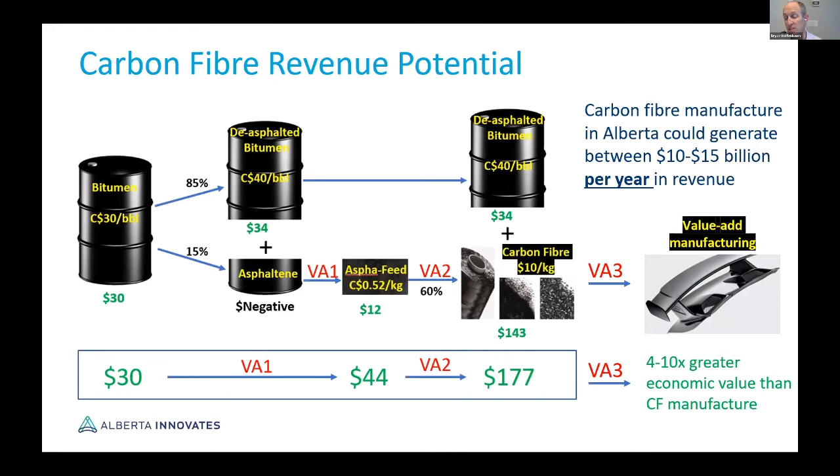But that in and of itself is still just the tip of the iceberg, because we've seen around the world that when you introduce a material into a region, the manufacturing that pops up all around using that new feedstock can be 4 to 10 times more economic value than the feedstock fabrication itself. So overall, carbon fiber manufacture could generate between $10 to $15 billion per year in revenue, right? And you still have about 85% of that original barrel to sell for fuel products.

Now, those are some lofty numbers. How real is this opportunity? So these pictures are a few years old. These were generated by Dr. Weixing Chen out of the University of Alberta. And these are fibers spun out of asphaltenes.

When we saw this a few years ago, we wanted to make sure we weren't drinking our own Kool-Aid. So we brought in a VP originally with SGL, now with Zoltek, who is the largest carbon fiber manufacturer in the world, to visit the lab, and he was excited. The industry has been working on finding alternative feedstocks for decades and effectively made no progress looking at lignin and coal and other opportunities. And what he saw, he would describe as leapfrogging most of those opportunities very rapidly.

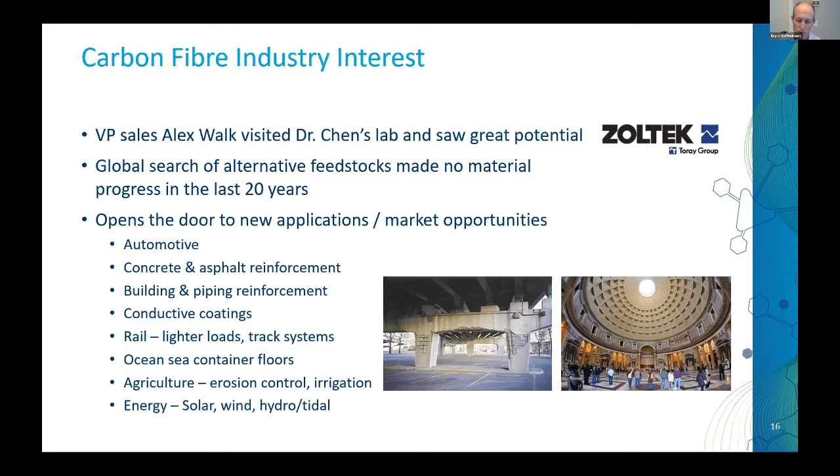So Alberta Innovates has been taking leadership in this. We launched the Carbon Fiber Grand Challenge about a year ago, and we've already completed phase 1. We are currently launching phase 2, with plans for phase 3 to follow at the end of next year. The overall goal is to have commercial scale carbon fiber production in Alberta before the end of the decade.

A little bit about phase one. We funded 19 different projects. Dozens of patents are currently in progress.

We've been building up some local capacity. Canada doesn't really have a carbon fiber industry, and through this program we've been able to start developing the expertise locally, as well as interfacing with experts in the US, Germany, and Australia.

What's really exciting is that it's not just Dr. Chen who has shown success, but we have multiple researchers who have now spun fiber out of asphaltene. They've taken different approaches, which is exciting to look at different pathways that could lead to potentially different products and opportunities.

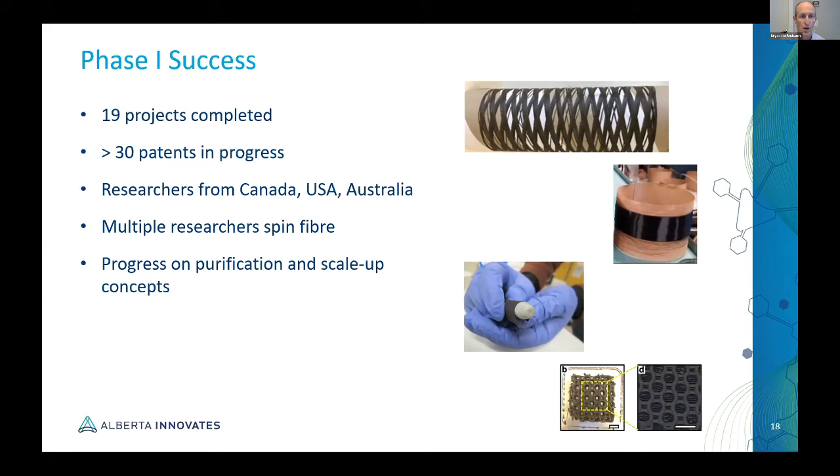Right now we're in phase two. This is just launching. We're going to have a press release in about 2 or 3 weeks with 12 projects that are being funded. Here we're really moving from a proof of concept to upping our performance capabilities.

That doesn't mean we'll necessarily compete against the highest ends. Frankly, I'm not sure we'll ever create aerospace grade carbon fiber out of asphaltene, but we are very much in real and potentially new markets. The plan is to scale up from here, from phase 2 to phase 3, and move from grams per day to kilograms per day.

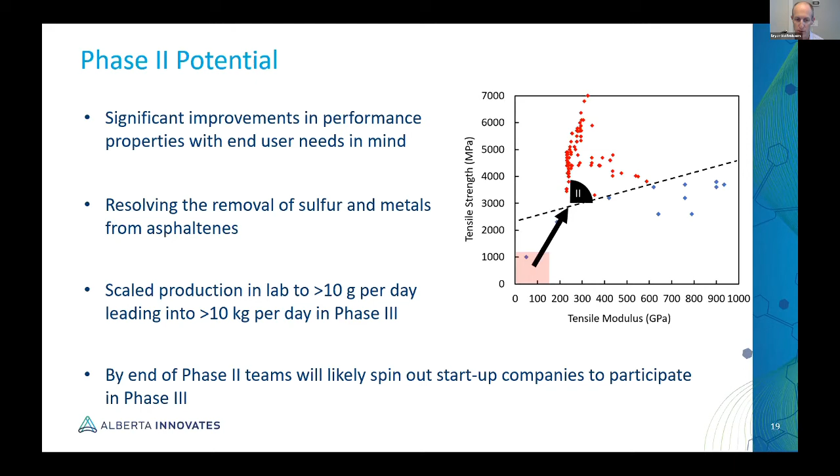Overall, carbon fiber represents huge potential for a multi-billion-dollar manufacturing industry in Alberta, and really a pan-Canadian opportunity. Bitumen-derived carbon fiber would have a lower greenhouse gas intensity, less than half of typical incumbent carbon fiber. What's really exciting is the emissions impact downstream of that.

Because if we can create this low-cost carbon fiber, it will start getting used to lighten vehicles. Dr. Kumar's recent study shows a 22 to 36% reduction in greenhouse gases from those lighter vehicles. We'll also create infrastructure that lasts longer, and of course we don't have to keep repaving roads and rebuilding bridges.

And that de-asphalted bitumen will be among the lowest greenhouse gas and lowest price in the world compared to other oils. So a very strong competitiveness. That's a lot about carbon fiber.

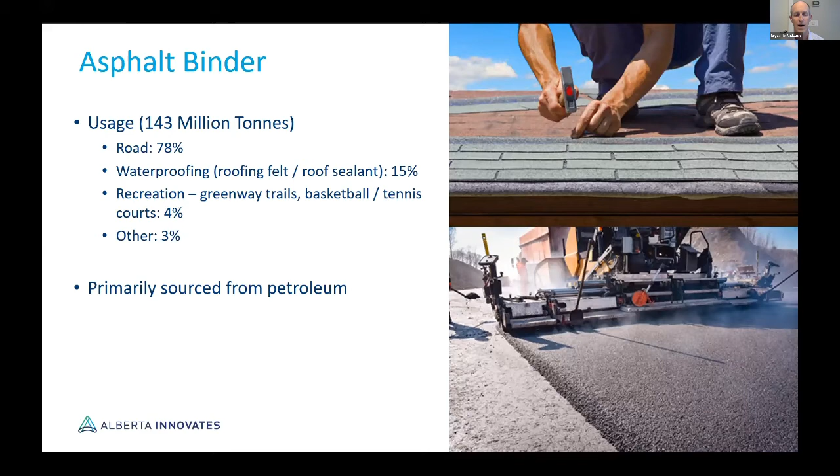I'm going to go a little quicker through asphalt binder. In terms of the sexy spectrum, this is at the opposite end of carbon fiber. Everyone is familiar with asphalt—we drive on it, we play tennis on it, it's on roofs, and of course it's sourced from petroleum. This is not a new idea per se.

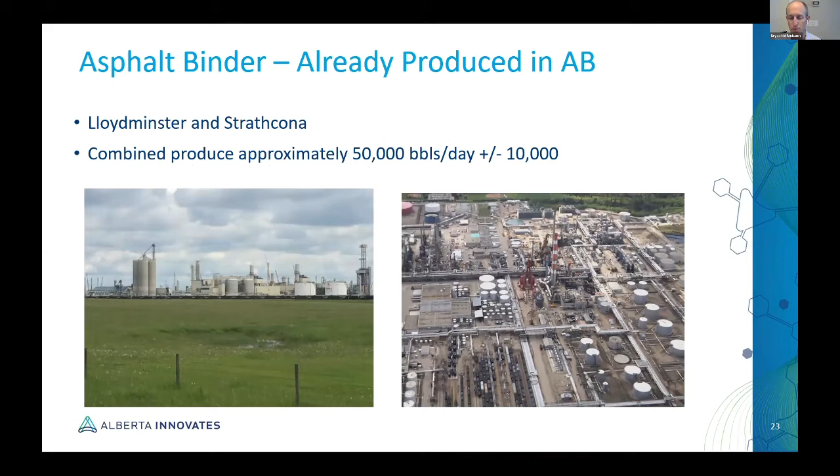Alberta's been producing asphalt binder for local use for decades through mostly two large facilities. But the opportunity really falls to expand that market. First of all, the quality of bitumen-derived asphalt binder is not very well known.

According to research done out of Queen's University by a world-renowned asphalt expert, Alberta bitumen has the second best performance in the world when it comes to making asphalt, surpassed only by Venezuelan crude, which is getting harder and harder to get your hands on. So we really have a premium product here, known in Canada but not very well known outside of that.

But the problem is we don't really have a way to get it to larger markets, because asphalt is shipped in molten form at high temperature, and it's not economical to move it long distances. So we need a better method of doing that, and that's where the technology development comes in.

We also think there is a global asphalt shortage coming in a net zero world. If you think back to that first slide where I showed the projections for global oil demand, we're going to see oil demand falling off, and oil supply is going to fall off because of the reduced need for transportation fuels.

But as much as we may not need transportation fuels in the same numbers in the future, we're still going to need asphalt. Doesn't matter what is fueling those vehicles, they still need to drive on something. At some point we have a crossover where we no longer have enough oil production to meet asphalt needs. So the goal here is to substantially increase production to service primarily North American and Southeast Asian customers.

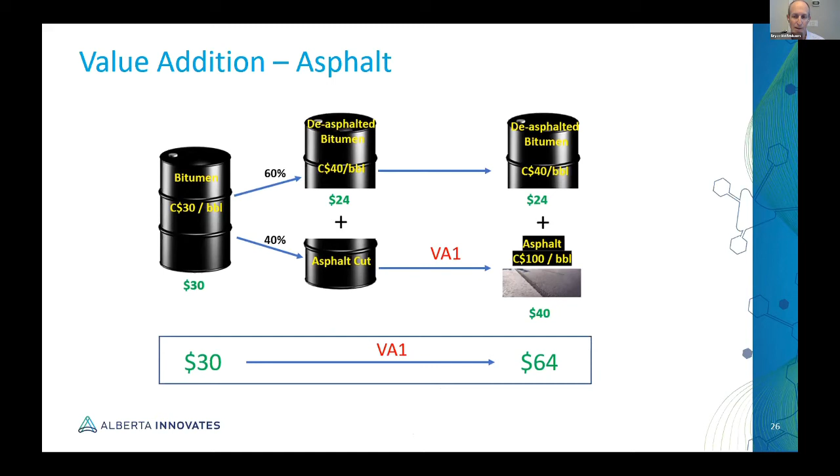The value add opportunity is not quite as dramatic as the carbon fiber one, but is still a very healthy amount of value added to the barrel by creating asphalt.

There are multiple companies right now working on transportation at ambient temperatures, either pelletization of the bitumen or pelletization of the asphalt binder itself. Solidium is a local example, a University of Calgary spinoff, and they are currently working on a 1,000 barrel a day pilot.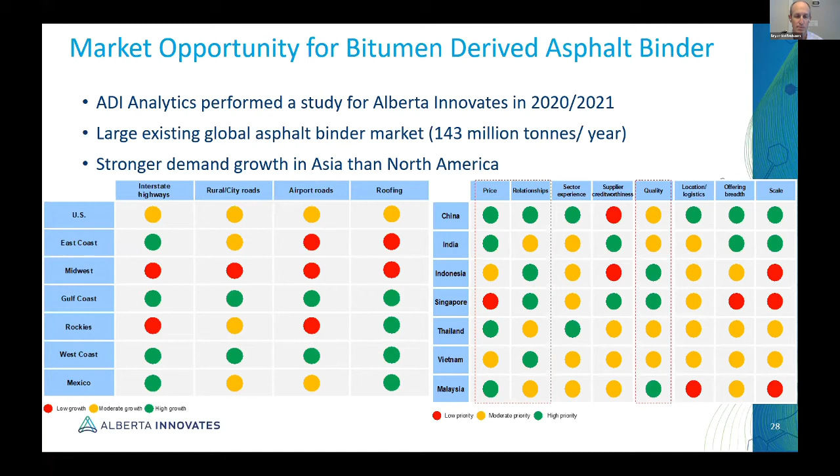We also commissioned a market study performed by ADI Analytics out of Texas to look at how we are actually going to access these markets. There are a couple of screenshots here, and the study is available on our website so anybody can download it. It effectively looks at, if we have this premium product, which jurisdictions are going to pay for a premium product and where would they deploy it. It starts to speak to how we're going to perform a market entry into these areas once we're able to transport it at ambient temperatures.

Okay, I've gone pretty quickly, but don't have a lot of time. I'm going to finish with 2 quick slides for the 2 most common questions I get. Question 1 is, Bryan, what is the best BBC product? Of course, it depends how you define the word best. In terms of product value, vanadium, which is used for flow batteries, has the $30 per kilogram, but it only makes up 200 parts per million of the barrel. So if by best you're trying to divert as much of the barrel as possible towards non-combustion, then vanadium isn't terribly effective. But of course, you can do that in combination with some of these other products. Now, all of these opportunities are better than selling raw bitumen, raw dilbit, as we do today.

The other question I get all the time is when? When is this going to be a reality? When can I go to Home Depot and buy some carbon fiber reinforced plywood for my deck? Well, not yet, which is what you always hear from innovation presentations. And it depends on the product. Asphalt is an example where the R&D phase is moving along quite well, and we have some large pilots underway, and we'll probably finish within the next couple of years. But the validation of asphalt is a longer issue because municipalities aren't going to just trust a couple of lab reports and say that it's a premium product. They're going to take some asphalt binder, pave a section of road, and then drive on it for 5 years to make sure it actually performs as expected with their humidity, their temperature swings and their traffic.

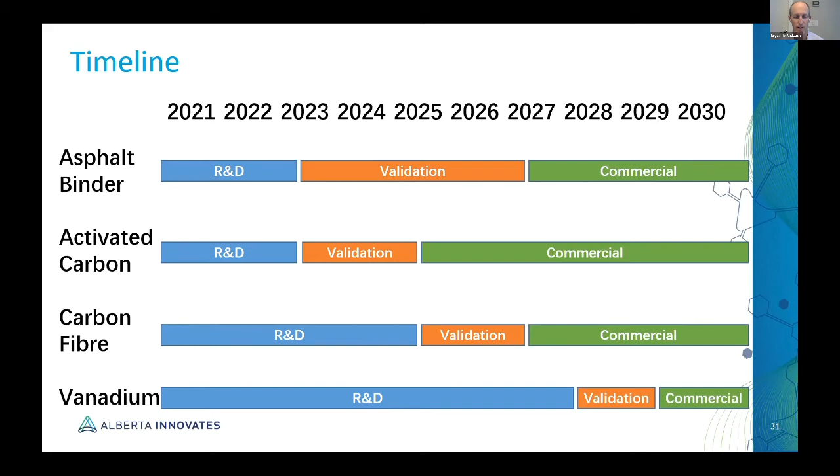On the other hand, carbon fiber has a longer runway on R&D. Lots of exciting things going on here, but we're still at the grams per day stage, so we still need about 4 years to get to a sanction type of decision. Fortunately, the validation phase can be a lot quicker because you can deploy that into products and test them much more rapidly. And of course, we will ultimately find a lot of new applications for this low-cost feedstock.

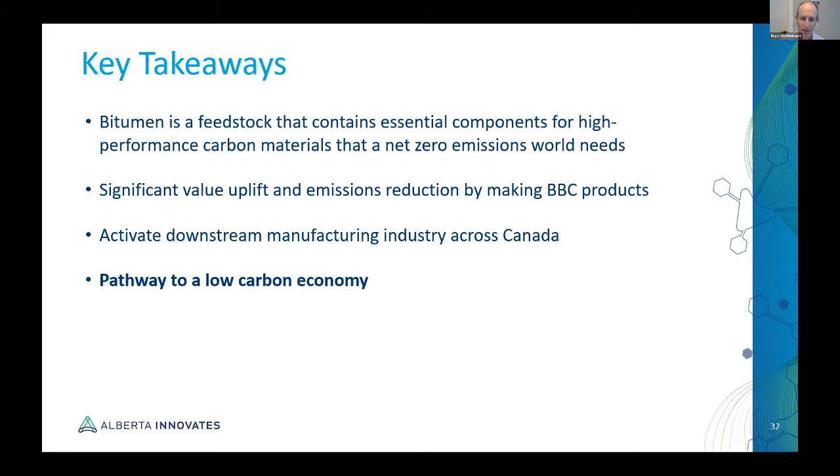So key takeaways: bitumen is a feedstock that has these essential components for high-performance carbon materials, including graphene and carbon nanotubes that a net zero emissions world needs. There is a very significant value uplift as well as an emissions reduction by making these BBC products. And we can activate a downstream manufacturing industry, not just in Alberta, but across Canada. At the end of the day, it's blasphemous to some to say it, but bitumen represents a pathway to a low carbon economy. It's not the pathway. Hydrogen has a significant role. There's a short list of others, but BBC, bitumen, is a significant opportunity to get us to a low carbon economy. So that's all I had. Thank you very much. Back to you, Max.

Thank you, Bryan. I shall say that your presentation definitely has given the dark bitumen a bright silver lining, eye-opening and very encouraging, particularly music to my ears, because my career has a lot of intimate relationships with carbon fiber as a reinforcement, or asphalt, or that stuff. Now I reveal what I used to do.

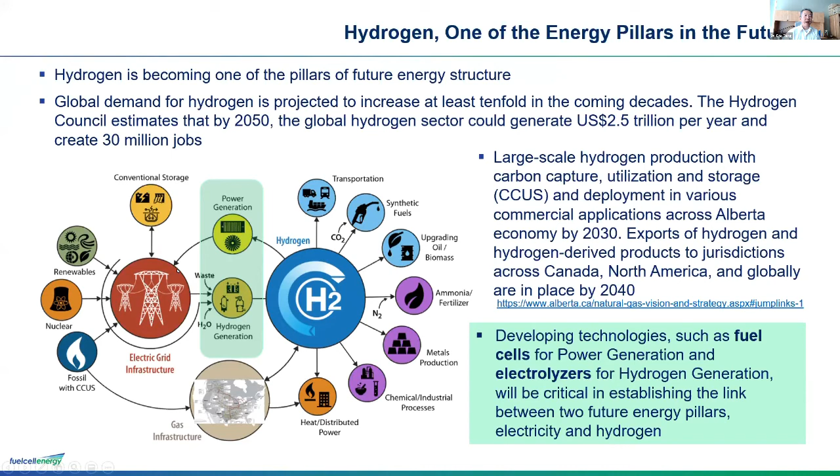In the center of this future energy map, you can see the linkage between the electrical grid and hydrogen in the green box I placed there. One side is hydrogen generation—making hydrogen from electricity. The other side is hydrogen turning into power generation and feeding back into the grid. This is the aspect I'm going to share with the audience today.

Max asked me to get into a little more detail about fuel cells and provide some fundamentals. Since this is the last talk, I'll borrow a cartoon and talk a bit more about the mechanism behind fuel cells.

This cartoon illustrates how the PEM cell works. Basically, hydrogen moves from the fuel tank to the anode side of an electrochemical cell—a fuel cell is essentially an electrochemical energy conversion device, just like a battery. At the anode side, electrons are stripped and move through the electrical circuit, making electricity. Meanwhile, the hydrogen ions move from the anode side to the cathode side and combine with oxygen, making water, which is exhausted out.

Of course, there are many different kinds of fuel cells, but the overall reaction is hydrogen plus oxygen making water, converting chemical energy into electrical energy, as shown here.

But unlike a battery, a fuel cell is like a combustion engine in that it can continue making power—you don't need charging and discharging cycles to store chemical energy at the electrode or electrolyte. Unlike an internal combustion engine though, there are no moving parts. It's an electrochemical reaction with high efficiency, and you don't burn the fuel.

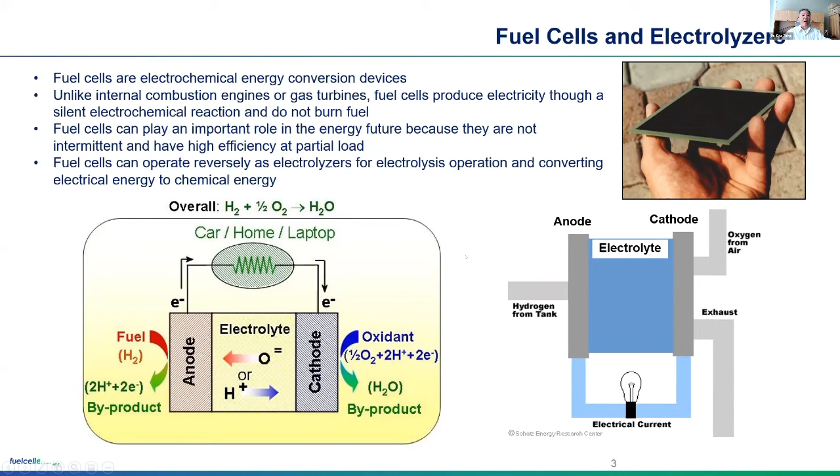So the other aspect is, what is an electrolyzer? It's a fuel cell operated in reverse, and it becomes an electrolyzer, able to convert electrical energy back into chemical energy, making hydrogen.

The types of fuel cells, or electrolyzers, usually depend on their electrolyte. For example, solid oxide fuel cells use ceramic as electrolyte, typically yttrium stabilized zirconia, and usually operate at a high temperature, like 650 to about 1,000 degrees Celsius. PEM fuel cells operate at a much lower temperature, usually 70 to 160 degrees Celsius at the high end.

Phosphoric acid fuel cells are more mature, but because of their operating temperature, efficiency, and lower power density, they're starting to slowly phase out. Another fuel cell that's not really solid is molten carbonate fuel cell, operating at about 600 to 650 degrees Celsius. Because of these characteristics of efficiency, power density, and operating temperature, each has its advantages and disadvantages.

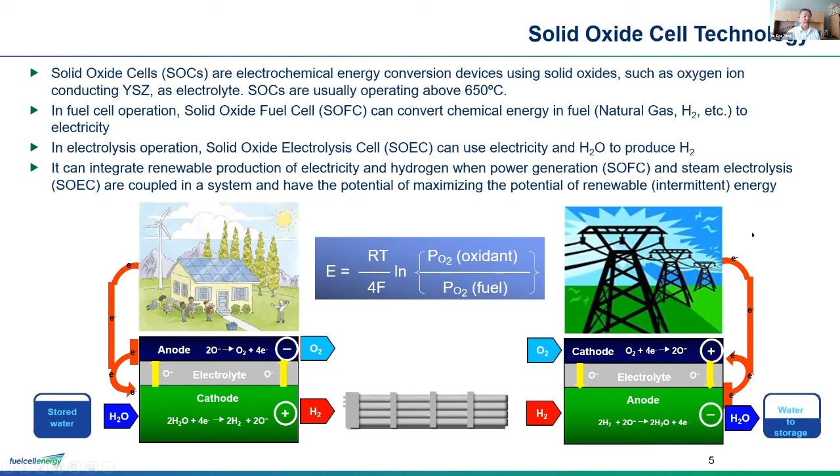Second, the high operating temperature also kinetically helps achieve very high current density. At our lab, we were even able to demonstrate operating a solid oxide electrolysis cell at 6 amps per square centimeter. In addition, you're also able to use waste heat to reduce the electricity requirement.

All the PEM-based or low temperature-based fuel cell water electrolysis systems have a jumping voltage from the fuel cell through the OCV towards electrolysis operation. That's because of the water electrolysis versus steam electrolysis difference, but also the overall internal resistance is usually higher than high temperature SOEC operations.

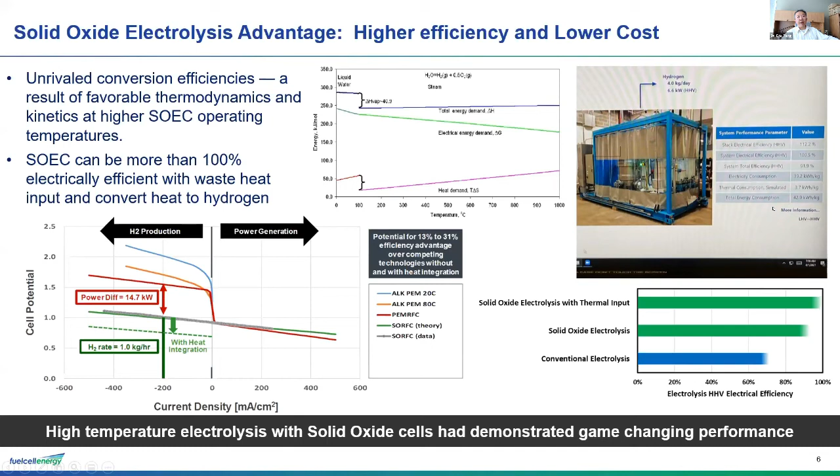This is one of our recent demos, we just demonstrated a very small SOEC unit. As you can see, because we're able to utilize the heat for this unit to generate hydrogen, our overall stack electrical efficiency at HHV is above 100%, at 112%. Even the system, because it's able to utilize heat, has overall electrical efficiency above 100%. If you're not just counting electrical efficiency, it's still close to 92%, and that's a significant difference between SOEC compared with PEM-based lower temperature electrolysis operation.

In addition to the past advantage, there are two more advantages to using SOC-based technology to do electricity for hydrogen generation. One is that SOEC stands up well with dynamic load operation, conditions with fluctuation of power levels, for example, the flowing output of wind powered generation. In our lab, we tested this for 20-minute cycles over 6,000 cycles, mimicking about 15 years of daily cycling, and were able to place this kind of system in the field.

The other advantage is that SOEC is able to thermally integrate with a range of chemical synthesis processes, enabling the recycling of captured CO2 and water into e-natural gas, gasoline, methanol, ammonia, and such. So it meshes well with the future economy, how to produce those synthetic fuels using renewable electricity to produce CO and syngas, CO and hydrogen.

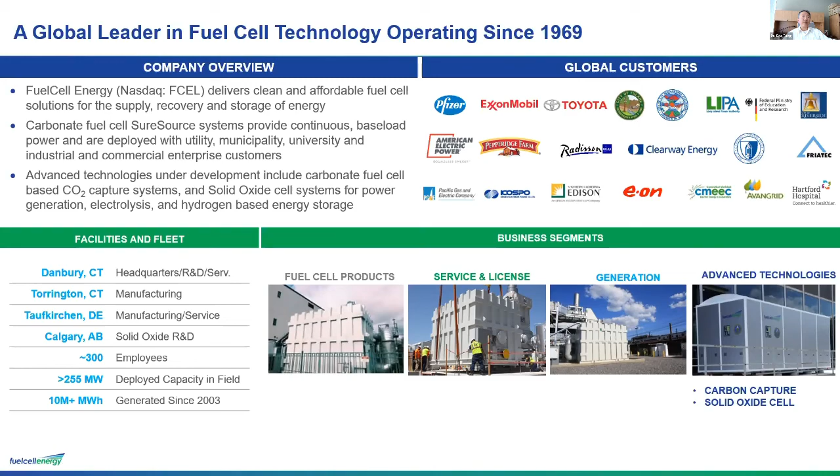But this facility is solely based on solid oxide fuel cell and solid oxide electrolysis studies and development. This facility is located at about 32,000 square feet in the Foothills Industrial Park. Our main focus, and we employ material scientists, mechanical engineers, chemical engineers, technicians, and electrical engineers.

We're leading not only the lab research and material development for the electrolyte and basic cells and stack designs, but we also have a cell and stack pilot production plant, including utilizing more conventional ceramic manufacturing processes and some semiconductor and wafer manufacturing processes to fabricate the cell and put together the stack.

We also have an extensive testing facility, probably one of the largest in the world for high temperature SOEC and SOFC testing, in Calgary.

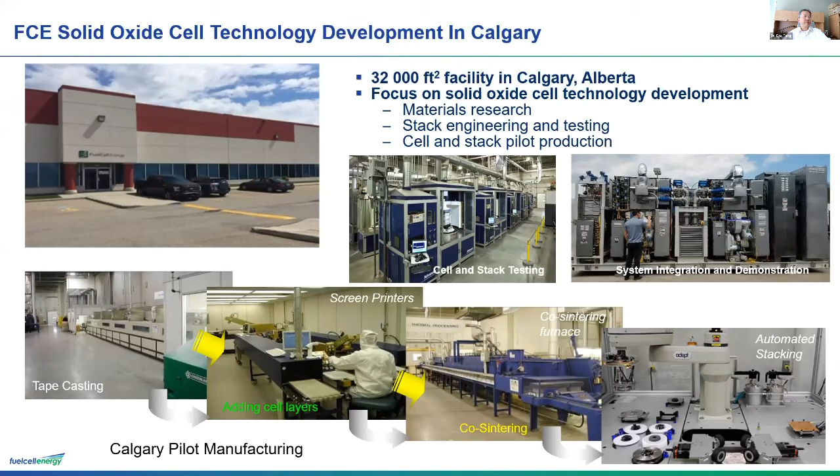SOEC research in Calgary started much later compared with fuel cell research. We started in 2009, and that's the first time we looked into the reversibility of SOFC operation. In 2011 we got DOE, U.S. Department of Energy EERE funding, and started doing the project on SOFC and SOEC cyclic studies.

In 2014 we got a DARPA, U.S. Department of Defense project, working with Boeing to develop a first unitized reversible system using SOFC plus SOEC and energy storage, hydrogen storage units, demonstrated in 2016.

In the meanwhile, our solid oxide fuel cell business also made it into large area applications, getting into about 200 kilowatt demonstrations. This was a finished demonstration in 2019 in Pittsburgh.

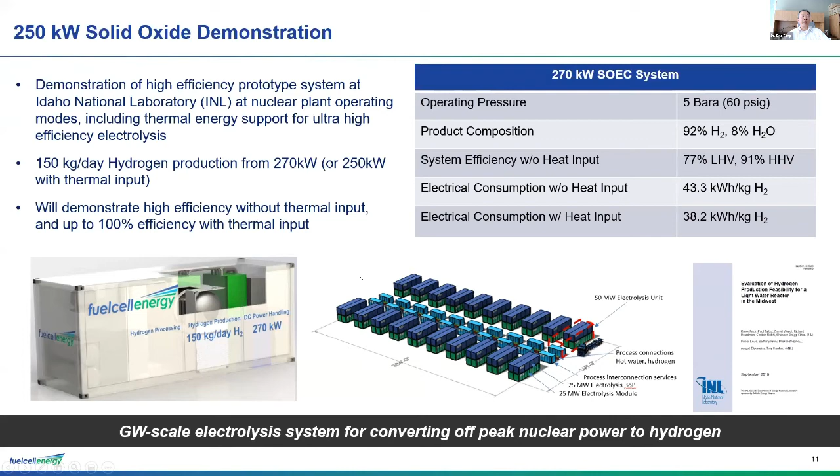The other project we're currently working on is a 1 megawatt RSOC. When we talk about RSOC, reversible solid oxide cell, it's for energy storage, linking units able to operate the same stack, same units, both in fuel cell and electrolysis operation, storing water and hydrogen. Most recently we've talked about being able to store the hydrogen in the pipeline, natural gas pipeline, to further improve the storage duration for hydrogen.

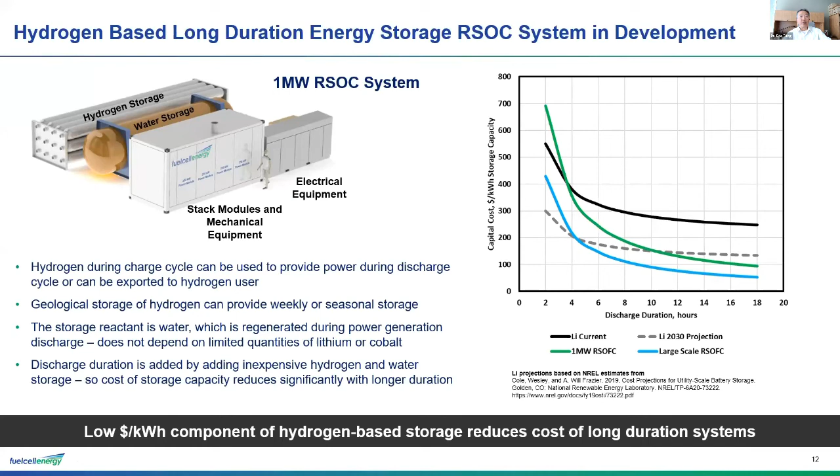That's pretty much all I want to share today. Thank you very much.

Thank you, Dr. Tang, very fascinating presentation on the cutting edge technology. I will be very pleased over the next while to organize a trip to visit your lab and factory. You're welcome, yeah please, I definitely will host your visit.